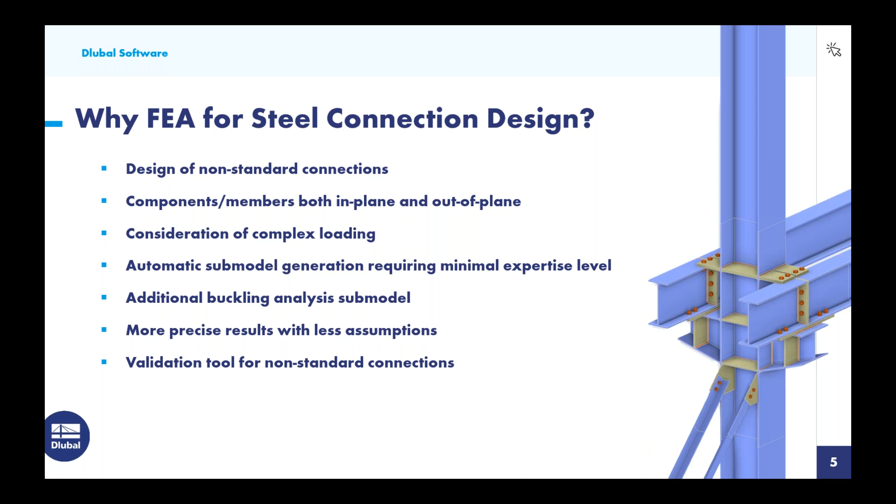So now moving on to the RFEM steel connection design concept, again a little unique in comparison to a lot of the other programs out there. We will probably generate the entire steel structure in RFEM. It's not required, but this is one approach that we could take.

With these one-dimensional members, such as beams, columns, and braces, these are actually going to be automatically converted into an FEA model, a submodel that we see on the right-hand side. You'll notice that those beams, columns, and braces now are two-dimensional surface elements that we can further mesh. Also, the bolt elements are going to be converted to 1D beam members as well, and we'll transfer the forces of these 1D bolt members back to the plate elements, the 2D surface elements, with what we call spoke members.

So we'll be able to view that within the submodel in our example today. Welds are also converted to 2D elements for a stress design, as well as one-dimensional rigid links to transfer those forces again back to the plate elements.

Now, we typically would model our steel structure with a linear elastic material. The program will automatically convert this linear elastic material to a nonlinear plastic material, so we'll be able to account for the yield strength of these steel materials themselves. We also will have some geometric nonlinearities that are automatically created.

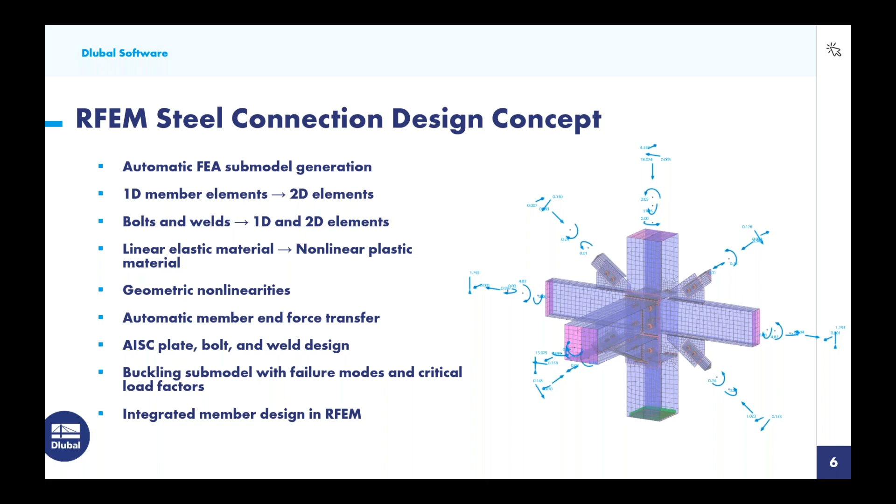And finally, the integrated member design within RFEM. Of course, we can get the connection design, but also the ability to design the members themselves, and not just steel, but any material that we offer. So you could combine this connection design with concrete, aluminum, cold form steel, even topics like fabric tensile structures. We could do the steel connection design within that same file.

Okay, so we will begin then in RFEM here with our initial example. When we create a new model, we will give it a model name. The type of model here is going to be in a 3D environment, so although we just have a simplified 2D frame here, we still are accounting for all forces in and out of plane.

Under the second tab, for those of you who are not familiar with our program, RFEM is the base program. This is where we can fully model, load a structure, and get the full static analysis. But if we want to do a more advanced analysis like dynamics, or we want to do design according to the various standards, this is where we would need to activate these optional add-ons, which you would purchase specific for your project design.

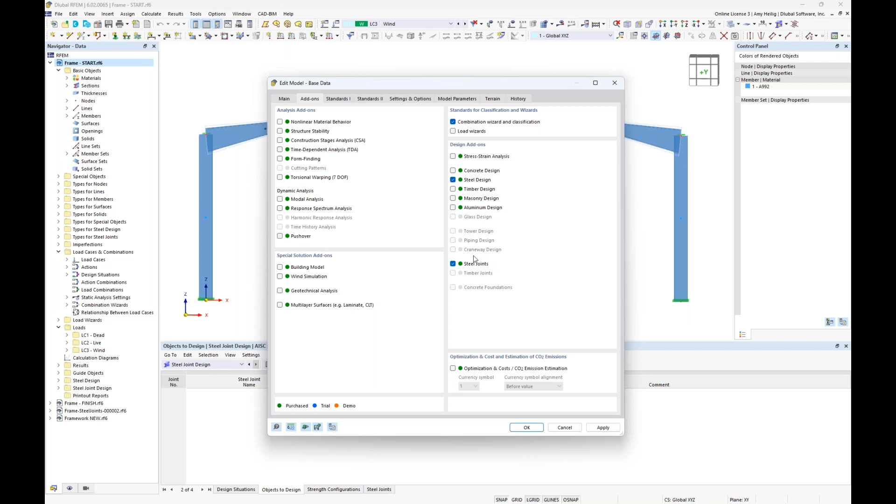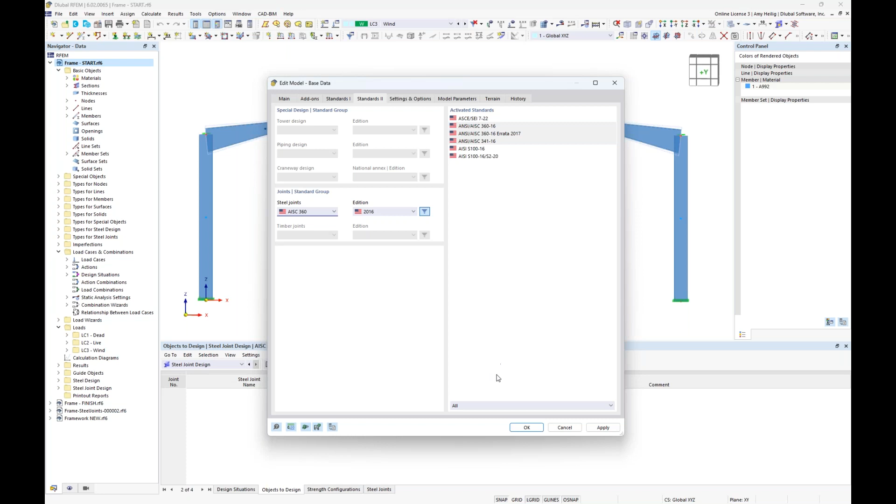Now for today, we'll be activating the steel design, which carries out the steel member design according to the AISC, and of course the steel joints for our connection design. Under the third tab, we will generate the load combinations automatically according to ASCE 7—we have added the 2022 standard, so that's available here. The steel member design will be carried out according to AISC 360 2016. And under our fourth tab, Standards 2, the steel connection design will also be carried out according to AISC 360.

So once all of this information is input into our base data, as you can see here, for the sake of time I've already modeled this simple 2D frame. Let's just quickly go over some of the information already shown. If we turn this into wireframe view, these members, as I mentioned, are just standard one-dimensional elements. This is pretty usual for any FEA program—when we model columns, beams, or braces, they're represented by this single line only. But if we turn this into rendered view, we get a better understanding of what this line represents.

Now, we also have here the materials assigned to these members, and currently these are all A992 linear elastic materials. We also have our cross sections.

You can see here the columns are assigned as W14 by 48, and for my beam members, these are W12 by 35s. But I also have applied a small taper at the beam member end.

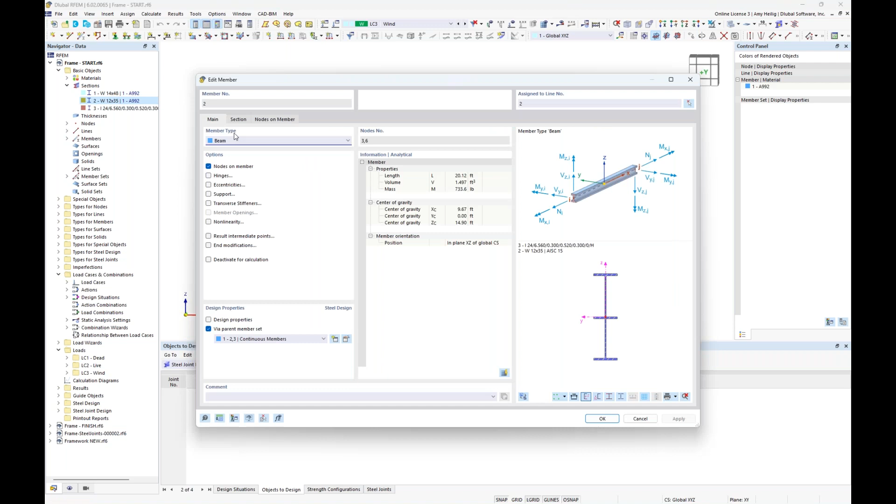If we double click on this member to go into the beam dialog box, under the second tab here, section, we have the ability to set a taper at the member start or the member end and other multiple options. I'm currently applying this taper at the first 25% of the member length.

We can also align the taper to the top of the member, for example, and this picture will update accordingly. So as mentioned, the beams are primarily W12 by 35, but where this taper occurs at the member start, I took that W12 by 35 and created it as a user-defined section to simply increase the depth, so now we'll linearly transition in the first 25% of this beam member back to the W12 by 35.

So that's a little bit about what's going on with our members. Turning this back into wireframe view to quickly explain our support conditions, we have a fully fixed support down here at the bottom, which was applied by utilizing the assign nodal support up here in my toolbar.

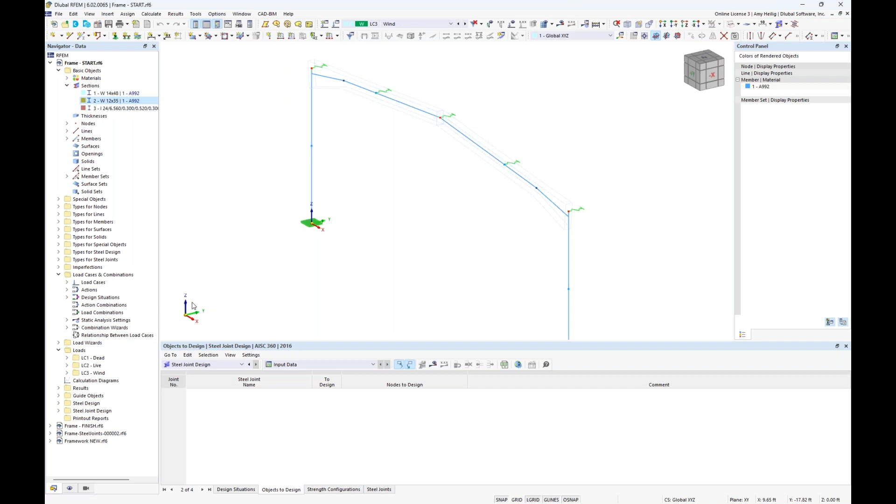Also, because we are working in a 3D environment, I went ahead and put some additional spring supports up here only in the lateral global Y direction, to account for maybe additional members framing in to give that lateral stability at the top of our frame.

And finally, we want to cover the loading. We have 3 simple load cases for today, and we can see these within our drop-down box up here at the top. If I turn on my loads, my dead load is 0.5 kips per foot, applied as a member load.

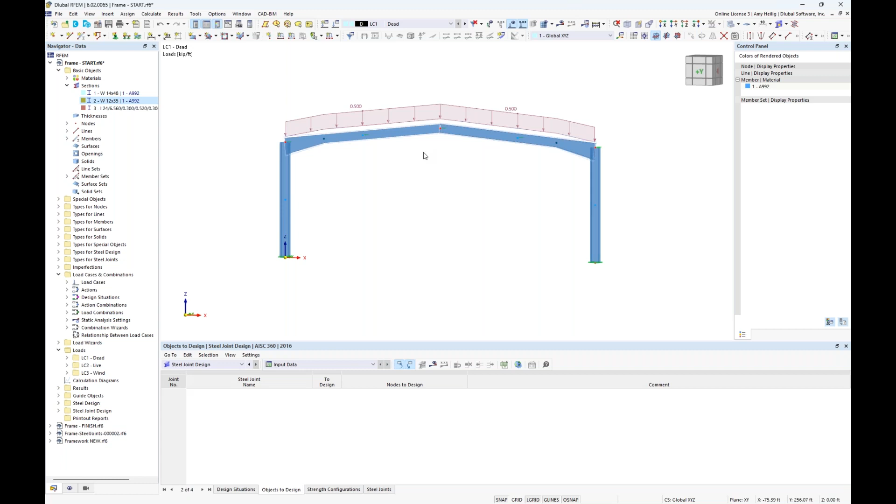When we look at our live load, same concept here, just with a reduced magnitude of 0.3 kips per foot. And then a very simple lateral load here for our wind load case with 0.3 kips per foot at the front side and 0.15 kips per foot at the rear side.

Going into our load cases and combinations dialog box, we will once again see here under our load cases our 3 simple load cases for today: dead, live, and wind. Category was set accordingly to the ASCE 7.

The program is automatically going to generate 2 design situations for us. We have our LRFD design situation and our ASD design situation. This is really nothing more than grouping together all of our factored load combinations according to ASCE 7 for this first design situation, and we can click on this little info button here to see the code references to those load combinations directly.

Notice that these are used within these optional add-ons that we turned on, so steel design and our steel joint or connection design. I will be utilizing these design situations. I'm carrying out my design according to LRFD for today.

Now we also have this second design situation, which is simply grouping together our unfactored load combinations. I'm going to use this for my serviceability checks for my steel member design, but we really don't need it for our connection design because serviceability is not something we're going to check.

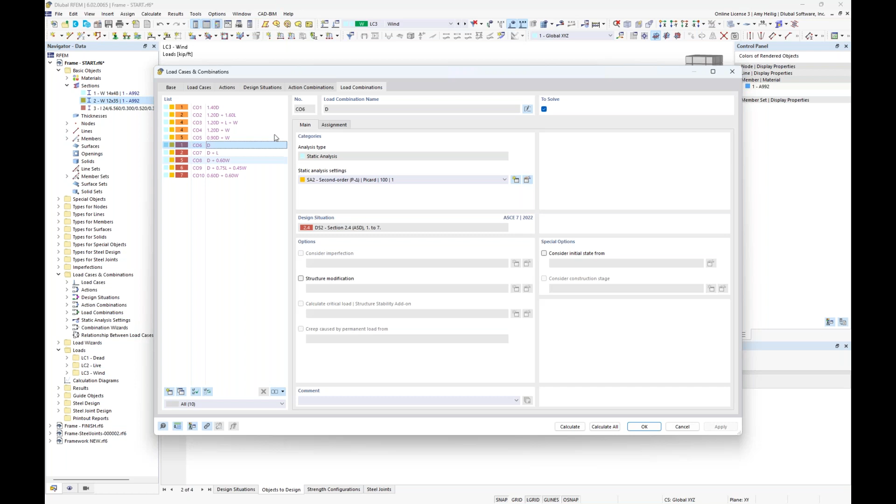Finally, under the load combinations, you can see the individual load combinations listed out based on the load cases I have defined. All of my factored load combinations are shown here in orange, which belong to that first design situation, and then we have our unfactored load combinations shown in red that belong to the second design situation. So just keep these design situations in mind, we'll come back to them a little bit later on.

Now that we have fully reviewed this model, let us begin by defining our first connection. Because I have activated the steel joints add-on under my base data, we now have a folder option over here on the left called types for steel joints. Currently this is empty, but I can right click to create a new steel joint.

Initially, I want to select the node that I would like to apply my first connection. So we can graphically select node number 6, or I could directly input the number here into this dialog box. Both of my members were automatically brought in.

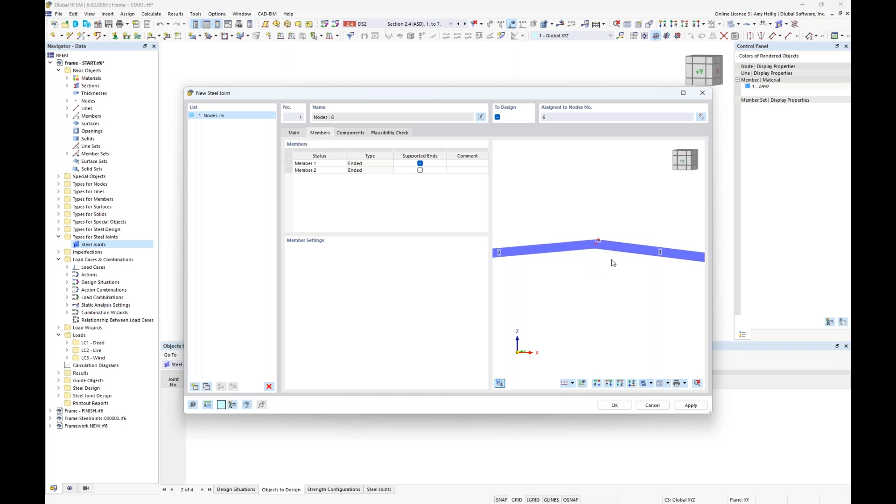Looking at this second tab, remember that we are going to extract out this submodel for our connection design and run it completely separate from our steel frame in Rfem. Because of this, we need to fully support one of these members in that submodel, so we'll utilize the support for the beam over on the left.

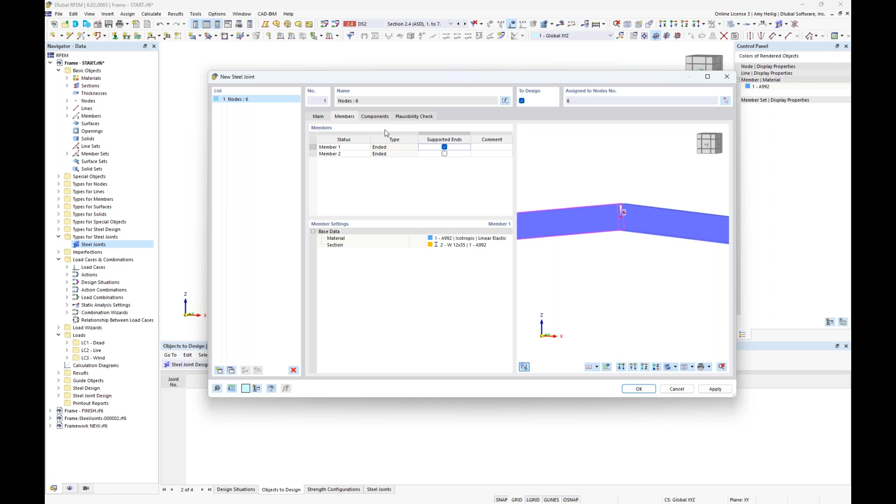Now the type is set to ended. This only means that if all of these members simply end at this connection, the type would be set to ended. In another scenario where we have a continuous column passing up through here, modeled as two separate members back in Rfem, we'd have an additional type option available in a dropdown called continuous. Under the Components tab, this is where we begin to build up our connection components.

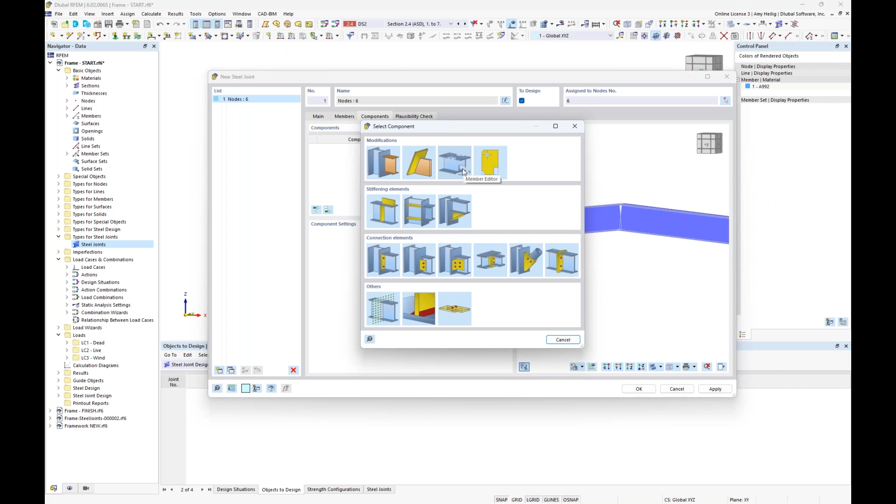We could individually do this with our connection database, our component database. We see each component we can individually input, such as end plates, fin plates, cleats, or plate-to-plate connections for beam splices. We also have stiffeners and haunches, and some additional modifications that relate to the geometry, so we can make member cuts, or add in openings or notches into our beam elements.

Rather than inputting these individual components, we could take advantage of our library options. Within these joint template library options, we have 4 general categories: rigid connections, pin connections, truss connections, and brace connections. Beginning with the rigid connections, we have additional subcategories such as beam to column, and within these subcategories we have additional template options.

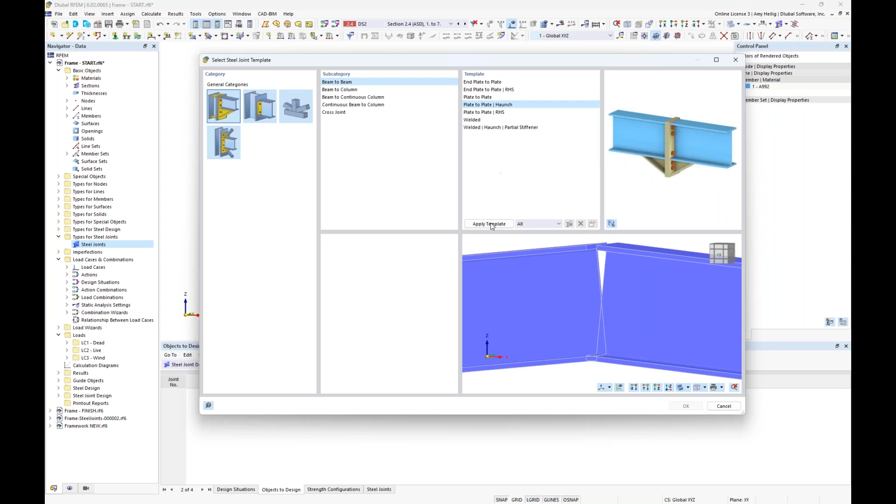Looking at beam to beam, we have an end plate to plate, and an end plate to plate with a rectangular hollow section. For today, we're going to utilize this option: plate to plate with a haunch. When I click apply template, it's automatically going to apply these components from this library to my specific members within my Rfem model. I can click OK, and now we see these individual components listed out and applied again to the members within the Rfem model background.

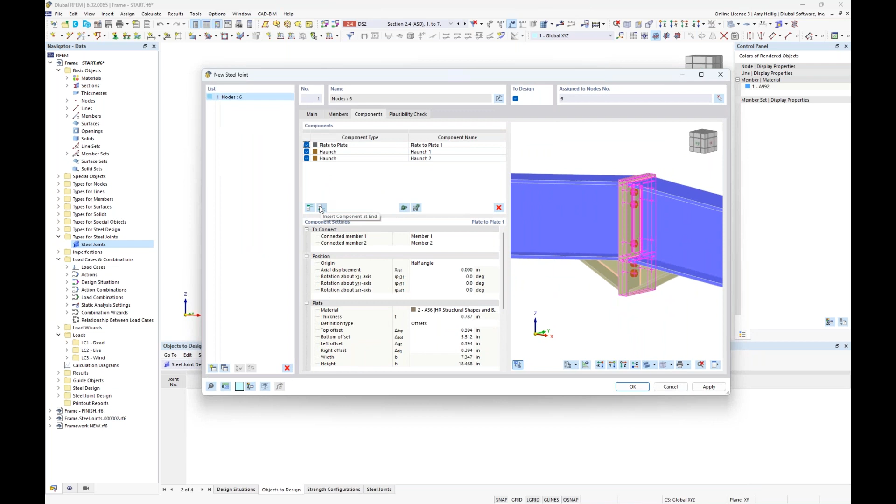We could certainly add on with the individual components and just use the library as a starting point. We'll need to make some modifications to our geometry, but once you have your connection set and use it quite often, it's recommended to save this under your own user-defined template. Within this button, you could give the connection a name, set the filter categories and subcategories, and that connection will always be available for any future Rfem model. That could be helpful if you don't want to redefine the geometry changes or components every time.

Starting off with the first component, you can see it is plate to plate, connecting both members 1 and 2. We can make modifications to the position, but we'll leave all of this as default. Now we need to define the material of these plates. I already have A36 defined within my Rfem model, but if you did not, you could access our material dialog box with these 3 buttons here.

Within the material dialog box, we can activate the material library. Over on the left, utilizing our filters to steel, to the AISC 360, we could choose whichever relevant steel material we'd like for this particular component. Utilizing the A36 that's already been defined, I will modify the thickness of my plate, changing each plate to 0.5 inches thick for a total thickness of 1 inch.

Now we need to define the plate offset. The offset just means what is the distance from the top of the plate to the top of the flange, and the bottom of the flange to the bottom of the plate, as well as left and right. Starting with the top offset, I'm going to modify this to a negative 0.375 value, dropping this plate down below the top flanges on my beam in the event that we have some type of sheathing material that we don't want interfering with these plates.

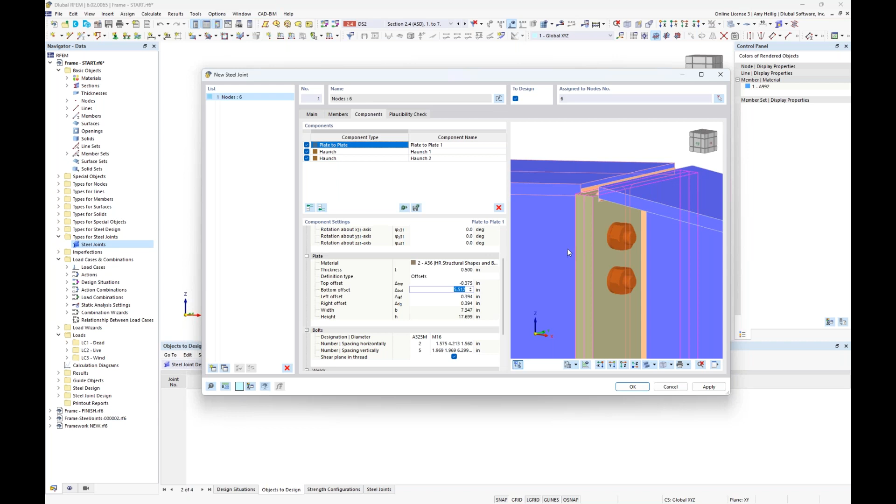Now, as far as my bottom offset, we'll go ahead and modify this to around 5 inches. And then we have the offset on the left and right, which I will set at 0.5 inches for the left, and I just hit enter on my keyboard.

And 0.5 inches on the right. Now, the dimensions of the plate will automatically update here.

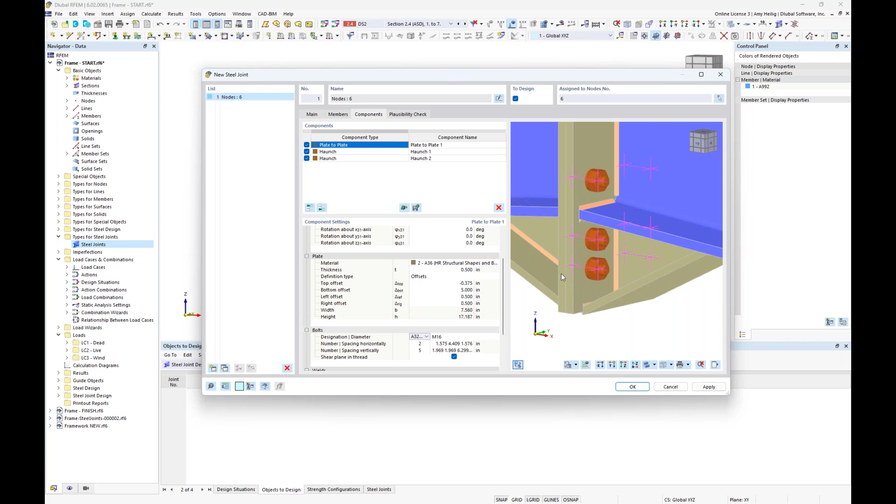Next up is our bolts. So we have here the designation of the bolts within our dropdown. We will select A325, and in the dropdown box next to this, we can then select the diameter. So we'll choose 3/4 inch diameter for our bolt layout today.

Then we have the number of bolts in the horizontal direction as well as the spacing. So currently we have 2 bolts in the horizontal direction, one on the left and one on the right. So we'll go ahead and stick with a total number of 2 bolts.

The input here in our second column is simply the horizontal spacing. So the first spacing that we want to input here is the distance from the edge of the plate to the center of the first bolt. So I can input 1.75 inches.

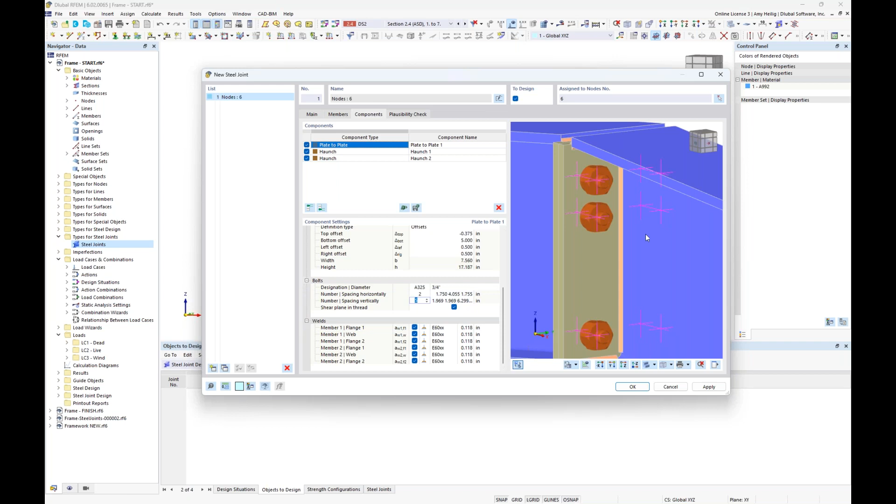I hit space on my keyboard. The next distance is from the bolt here to the bolt on the other side, and that's going to be 4.055. Then if I just hit enter, the program is intelligent enough to set that additional dimension here from the center of the bolt to the edge of the plate.

Now, keep in mind that the program will attempt to center these horizontally, so you may not need to make any changes there, but if we want to adjust that spacing, this is how we would do so.

Now, as far as the bolts in the vertical direction, currently we have 5 bolts, but I'd like to reduce this to 3 bolts instead. And obviously, once we update this, we need to adjust our spacing.

So we have the vertical spacing. The first input option is going to be from the top of plate to the center of my first bolt, which will be 3.5 inches. I hit space on my keyboard.

The next spacing will be from this first bolt to the second bolt, which will be 5.5 inches. I hit space again, and we need to lastly define the spacing here between bolt number 2 and bolt number 3 as 5 inches. I hit enter on my keyboard. The program will populate the last spacing here from our bolt down to the bottom of the plate.

Now, is the thread located in the shear plane for our bolts? If so, we leave this option turned on. If not, we would go ahead and uncheck it.

And finally, we move on to the welds. So we can see here that these welds are labeled within this first column, but as I scroll through them here, they're also highlighted graphically.

And if I didn't want to apply any one of these welds, I could just simply uncheck it here, and that weld would be taken away from this particular connection.

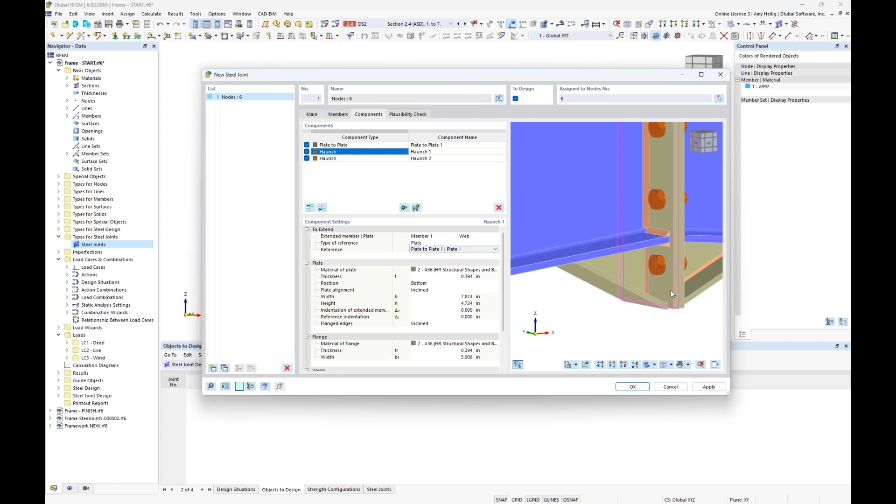And we want this haunch to be extended then to our plate shown here. The material is set to A36. We do want to modify here the thickness to maybe 0.5 inches.

We can also modify the width and the height. So I'll modify the width here to 12 inches, and we should see that graphically display here. The height is going to be 5 inches. And you'll also see that the program automatically included a flange here as part of my haunch.

If I wanted to get rid of that flange, I could go ahead and use my drop-down box here to select the no option, and that flange should disappear.

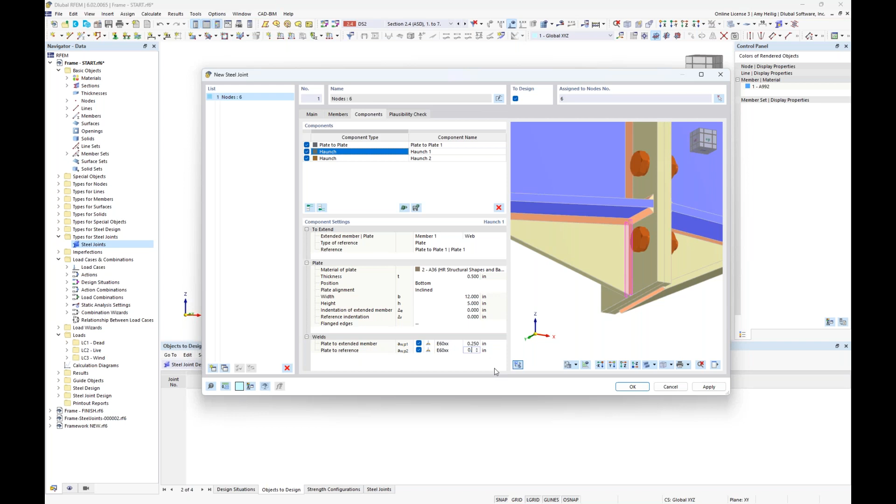Now, finally, we have our weld input for the haunch itself, and we have two welds, which we'll go ahead and leave as a default double fillet weld on either side. But our first weld is on the underside from the plate to the bottom flange, where we will modify the throat thickness to 0.25. And our second weld is going to be from the haunch to this end plate here, which again, we will modify that throat thickness to 0.25 as well.

So looking at our haunch on the left-hand side, again, we're complete with this second component. We move over here on the right-hand side, and we want to make those exact same changes that we just did to the left-hand side.

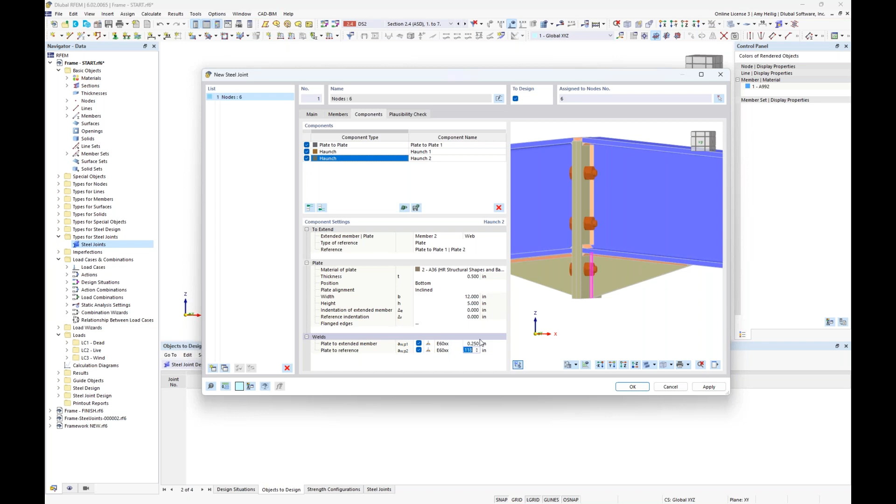So we'll modify here the thickness to 0.5 inches. We want to modify the width to 12 and the height to 5 inches. And then we will also want to select no flange here in our dropdown. And finally, we will modify the throat thickness to 0.25 for both of those input options.

So realistically, this connection is now complete. And again, if you utilize this connection quite often, save it to your user-defined library so you can pull it open with these modifications already set.

The final thing to do with any connection is to check out this fourth tab, the plausibility check. So we see here, it's a green checkbox with no errors found. If we had any issues, such as maybe bolts overlapping welds or plate elements, or maybe we have a weld extending beyond a plate, these would all be flagged here so that we could take care of those errors before we move forward with the calculation.

So now that this connection is complete, we can click OK here. And what we should see is that graphically, we're going to represent this connection here within the main RFEM model.

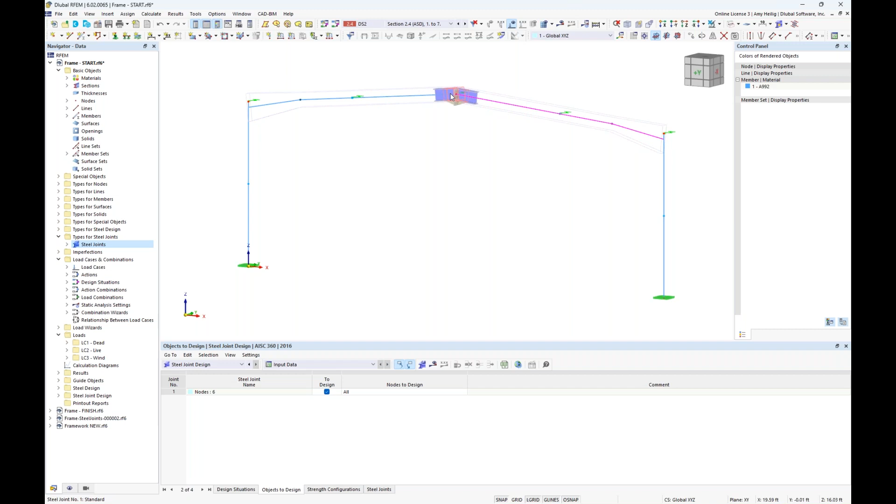Now, to explain a little bit further about what's going on, you'll notice that when I turn this to wireframe view, we still have those one-dimensional members. And notice that these members are still framing from node to node. We're not going to cut off this one-dimensional member where this connection starts.

Really, this is just a graphical display of that model that will be acted out and completely calculated separately from this RFEM model. But it is nice just to view in a little bit more detail exactly what's going on.

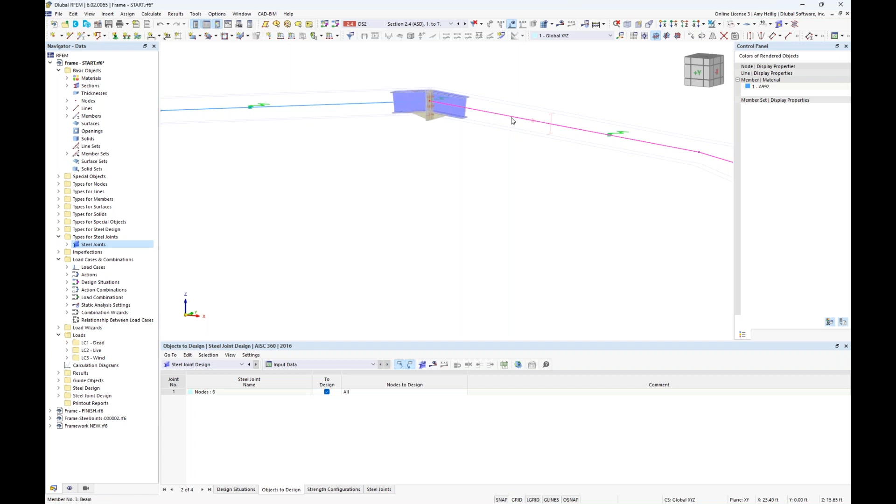Also keep in mind too, a common question is that the member end forces for this beam will actually be taken at this node. They are not taken at this distance away where the connection will begin.

Going back then into the rendered view, we can see this connection here with all of the available components, the geometry changes that we just input.

Now, with the display of our connection, we also have an additional option up here in our toolbar where we can completely hide that joint model with this dropdown if we're not interested in seeing it. We also have this simplified joint model, which is just represented by some box type symbols here. And finally, we have the detailed joint model, which is currently default and turned on.

So now that we have defined this first connection, we would like to move on to our second connection, which is going to be the tapered beam to the column.

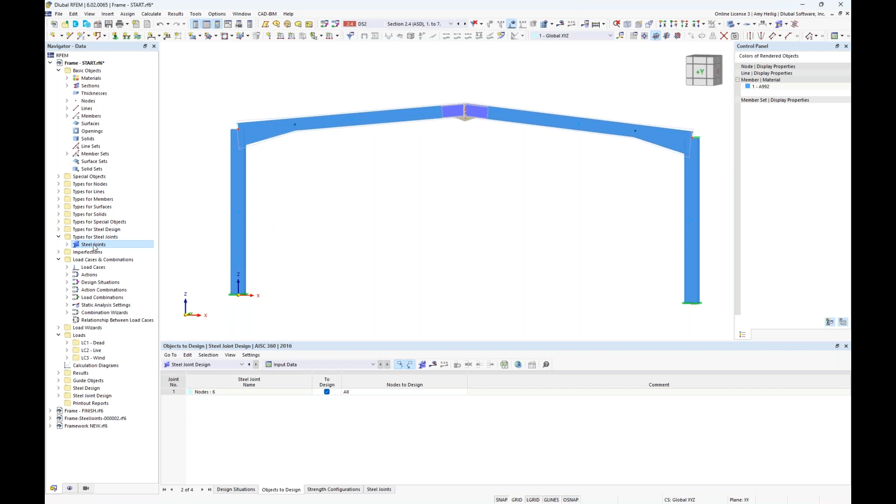So we can yet again right click over here in the types for steel joints to create a new steel joint definition. And we want to graphically select here node number 3. I click OK. The two members are automatically imported in here, and under the second tab, if you remember, because we're creating that FEA submodel, at least one of these members needs to be fully supported.

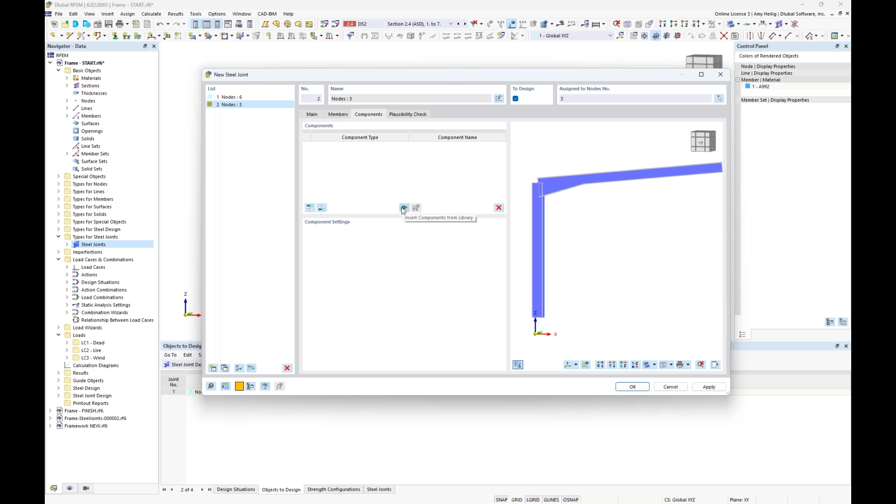So we'll go ahead and leave the column as fully supported. Under the components, we will take advantage of our library option here.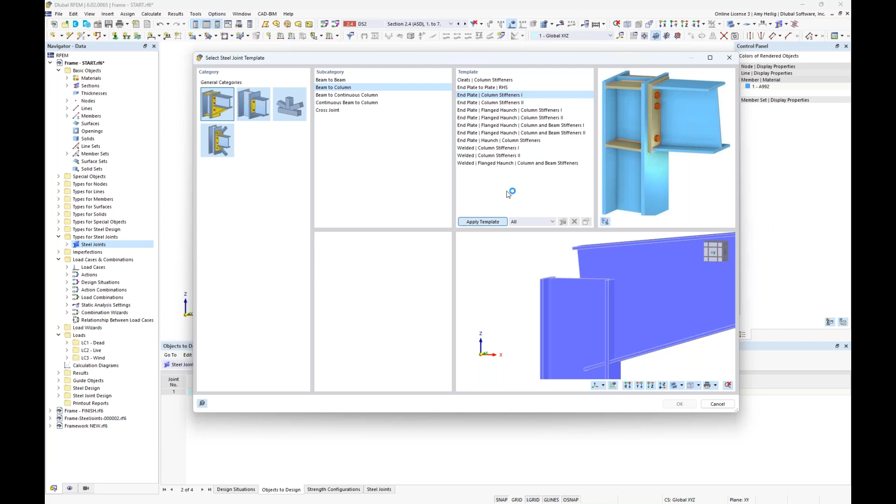And this time under our rigid connection, we want to modify this to a beam to a column. Within the additional template options, there are many different options, including cleats, maybe an end plate. For today, we want to utilize the column with stiffeners. I'm going to hit apply, and we should see these individual components applied directly to my model.

I think we could all look at this connection and agree that this certainly does not look correct. This is really just an issue of the program not knowing which member is the beam versus which is the column, controlled with our options on the left. In our dropdown for the column, we change this to member number 1, and for our beam element, we specify member number 2. Now this connection should look quite a bit better.

So we click OK. Just like with our previous joint, we will now see all of those components individually listed out here. Let's begin with the end plate. You can see here that we are taking member number 2, which is that tapered member, and connecting it to the reference member number 1.

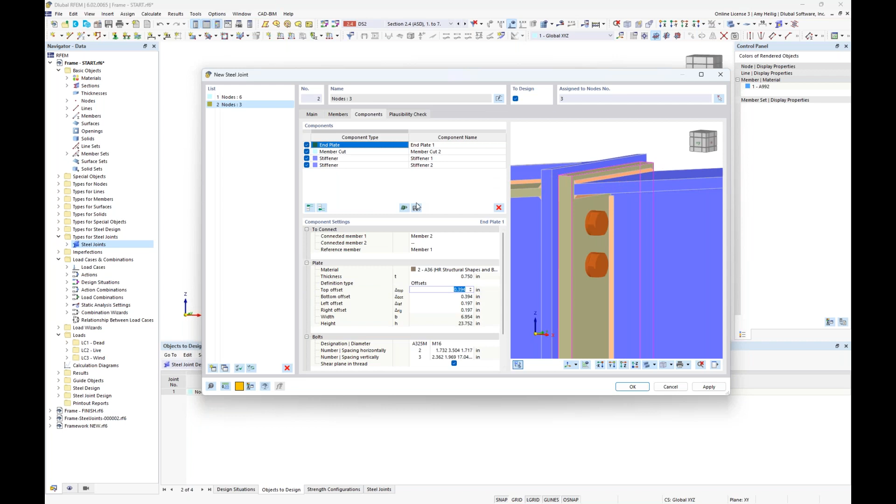Steel A36 will be utilized for the material. If we want to modify the thickness, we can input this as 0.75. Very similar to our last plate element, we want to define the offsets. Looking at our top offset, remember the top of the flange to the top of the plate, we'll modify this to 0.5 inches.

When we look at the offset at the bottom, we will modify this to 1 inch. Then we have an offset on the left and right hand side of those flanges, and we'll set this as 0.25 on the left and 0.25 inches on the right.

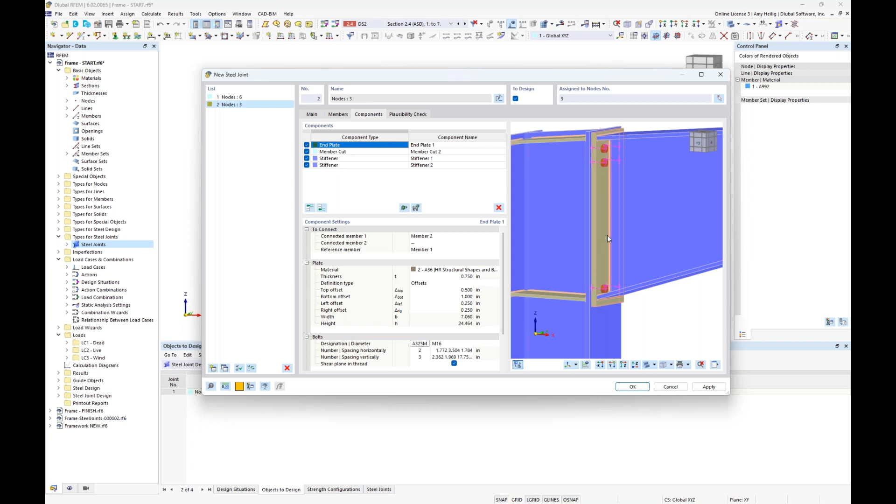Now looking at our bolts, clearly we need to make some modifications here. So we will be selecting A325 from our dropdown. The diameter of the bolt is going to be 7/8 inches. We are going to leave this as 2 bolts on either side, 1 bolt on the left, 1 bolt on the right. The program again has centered these, so I'll leave these as default options.

As far as the vertical bolts, currently we have 3 shown, but I want to increase this to 4. Once I input the 4 bolts, we'll make some modifications to our vertical spacing as well. The first input option is from the top of the plate to the center of the first bolt in the vertical direction, which will be 3.5 inches.

I hit space on my keyboard. We now need to define the spacing from bolt number 1 to bolt number 2, which will be 5.5. I'm actually going to apply 5.5 inches to the additional spacing 3 times between all of these bolts. I then hit enter on my keyboard, and we see all of those update graphically here. We'll leave the shear plane and thread turned on.

Finally, we have our welds. So we have the weld at the top flange, again leaving the fillet weld on either side as default with E60 strength. We'll modify the throat thickness to 0.25 once again. We take a look at our weld at the web here, and modify this throat thickness at 0.25, and do the same for our weld down at the bottom, modifying this thickness to 0.25. So now our end plate is complete.

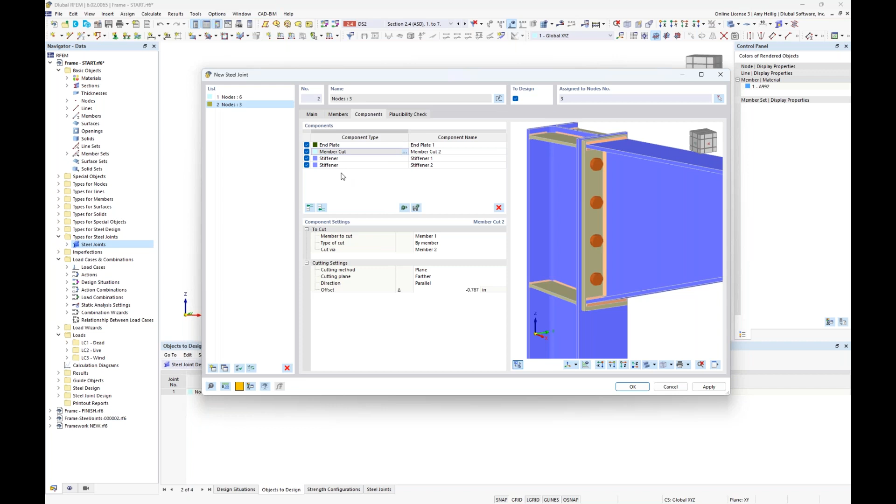So we'd like to move on to our second component. Remember that not all components necessarily insert a physical object into this connection, but there are components that have to deal with modifying the geometry. One of them is called a member cut. Keep in mind that for any one of these components, we can always not consider them by unchecking them here.

Without that member cut, you can see here that the column just stops essentially at the middle of that tapered beam. So this member cut will actually extend this column up to the top flange of the beam. We're taking member number 1 here, and we're going to make that cut by referencing member number 2. Now the cutting method is set to a plane, and the cutting plane has 2 options, either closer or farther.

When I set this to closer, notice that the column is automatically going to be cut off here at the bottom flange. But when I use the option farther, we'll extend that column to the top flange instead. Additionally, the cut of this column is matching the incline or pitch of my tapered member shown here in this 2-dimensional frame.

If we want this column to be completely straight across, we can use our drop-down options to choose perpendicular instead. Now notice that column is cut straight across, not considering that incline. We'll go ahead and match that pitch by changing this back to parallel, and now that will match the top flange of my tapered beam.

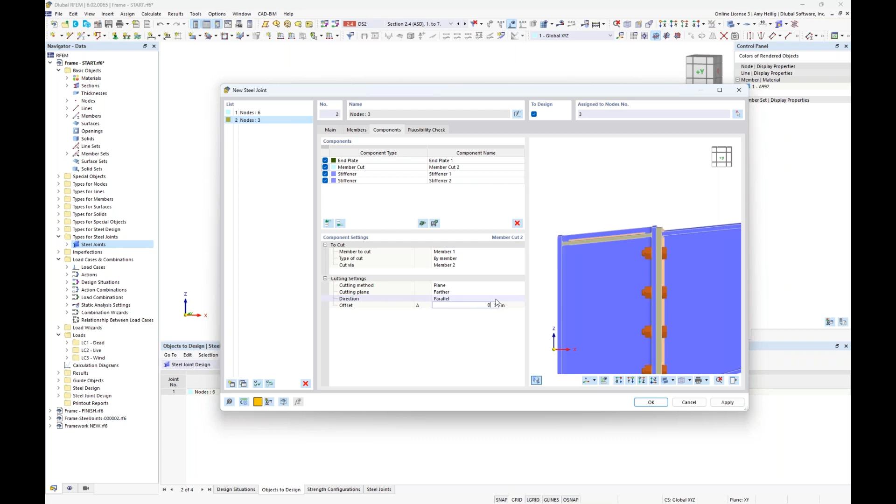We also have the ability to set an offset. If I have this offset set at 0, it simply makes that member cut to match the top flange, or I can set this offset to negative 0.75 inches, which will extend it slightly above the top of this beam. That's all that is needed for our second component.

We now want to move on to the stiffener. We see here this stiffener applied, and the stiffened member is referencing member number 1, but we want to apply these stiffeners based on referencing member number 2, the beam. The material is A36 once again.

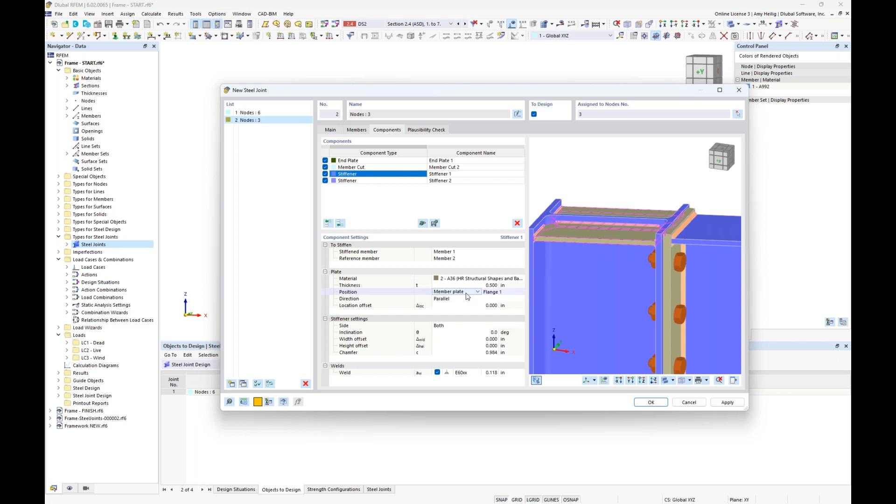Perhaps we want to modify the thickness to 0.5 inches. And we are applying these stiffeners based off the member plate flange number 1 here of our beam, so everything is parallel to that top flange.

Alternatively, if I didn't want it to be parallel, I can make it perpendicular so that we have the stiffener going straight across. Of course, this doesn't make sense here because our column isn't extended up high enough, so we'll go ahead and change this back to parallel.

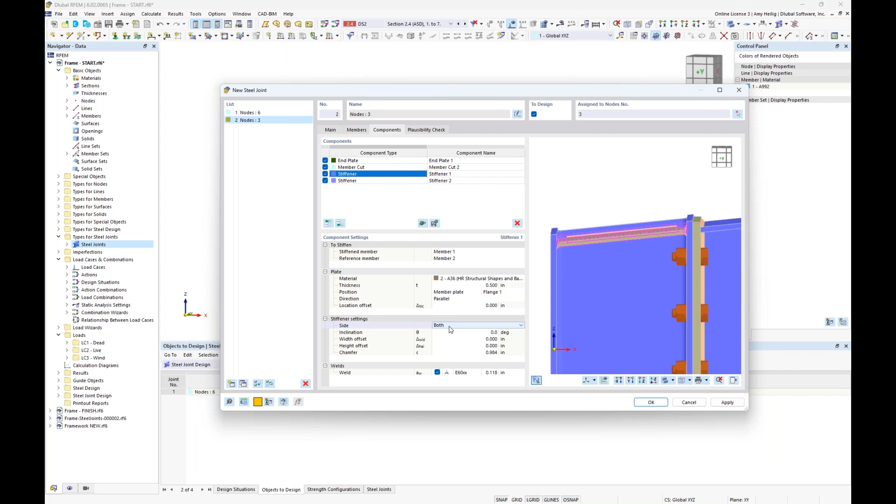We could also add in an offset to move the stiffener up or down. And we also have the ability here to set the stiffener on both sides, or within this drop-down option, we could choose just the left or just the right.

And finally, as far as geometry, we have a small chamfer here, so we want to set this dimension to 1 inch exactly.

Finally, we have the weld. Just like what we saw with our other weld input for our additional components, we're going to leave this as a double fillet weld, E60, with a throat thickness of 0.25. So this is just connecting that stiffener back to the column.

Now we also have our last component here for our stiffener shown here at the bottom flange. Again, if I didn't want to account for it, I could just completely turn it off, or if I wanted to delete it altogether, I can use this red X.

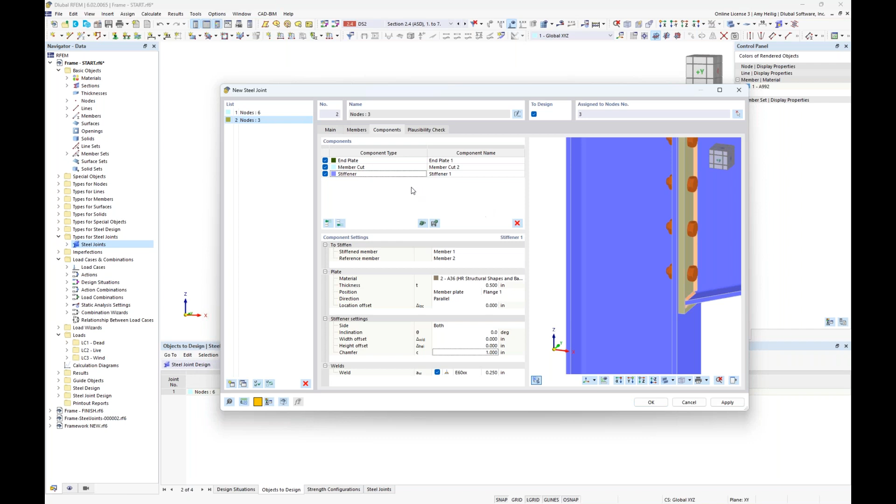So I just make sure that I'm selected here under that particular component. I delete it altogether. The reason why I wanted to show you is that we have a nice feature here for existing components: if we right click, we can copy the component to the end of this list. This is a huge advantage if we've made a lot of modifications to our component and we don't want to input all that information again, we just simply make a copy.

Now currently, the second stiffener is sitting right on top of the first stiffener, so that's not ideal. But what we can do here is simply move it by referencing, instead of flange number 1, we'll select flange number 2, which is highlighted here as I select it within my dropdown. Now currently it's set to parallel, so it matches the angle here of that taper.

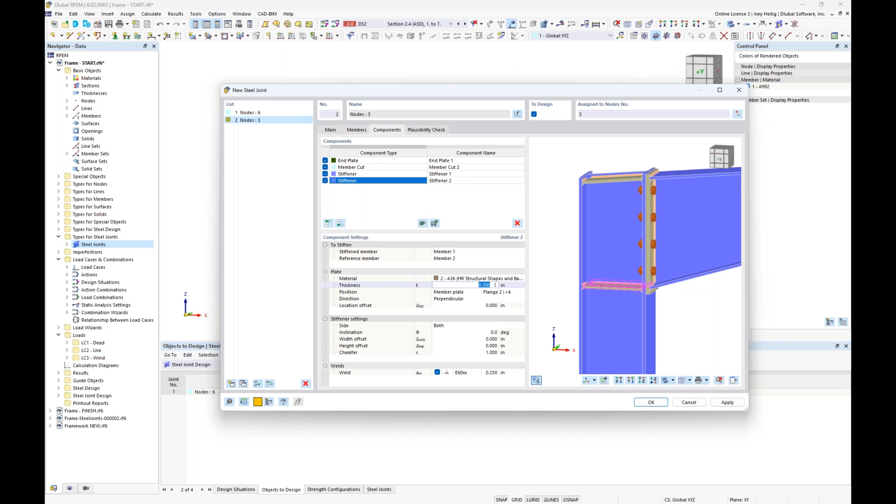But if we wanted to modify this to perpendicular, we can do so. Now we see that stiffener shown here at the bottom in the perpendicular position. And if we wanted to modify the thickness to something smaller, we could do so here at 0.375. So now this fourth component is now complete.

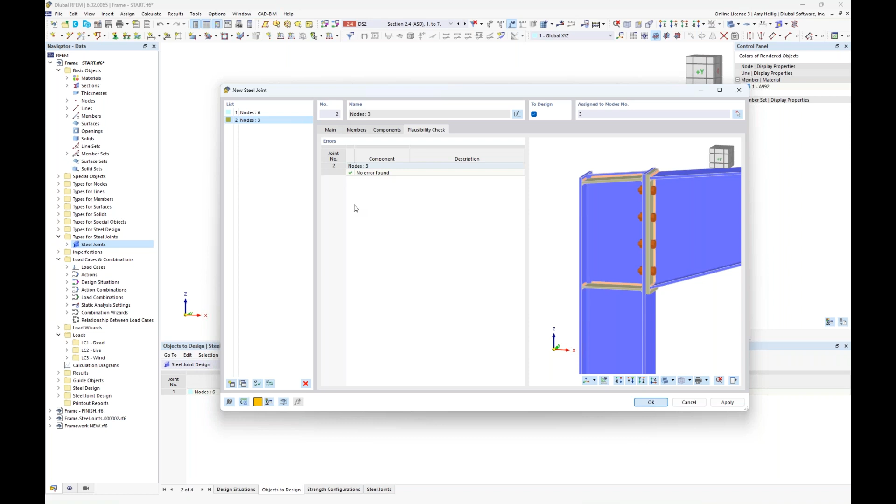Again, checking the plausibility, no errors found. That's great. If we had any issues with geometry or anything else, the program would notify us here. So when I click OK, we should now see this connection applied over here to the left-hand side.

And what you will notice is that we actually want to apply this exact same connection here on the left-hand side to the right-hand side. Rather than redefining all of those additional components and a new steel joint, the program's intelligent enough that I can go back to node number 3 here, my connection that I just defined, and in addition, select node number 11.

And I click OK. So we have an identical layout for our joint template here. It's just simply the mirror image of the other side. So if you have the exact same connection details, but it's just slightly oriented differently within the model, you could certainly apply multiple nodes to the same joint definition.

All right, so we are almost ready to move forward with our analysis and design. But one thing I wanted to cover before we do: if we go back into the steel joints and edit the dialog box, this brings us back into the dialog box we've previously been in, but you'll notice there are design configurations, and one option here for strength configuration with a default setting already specified.

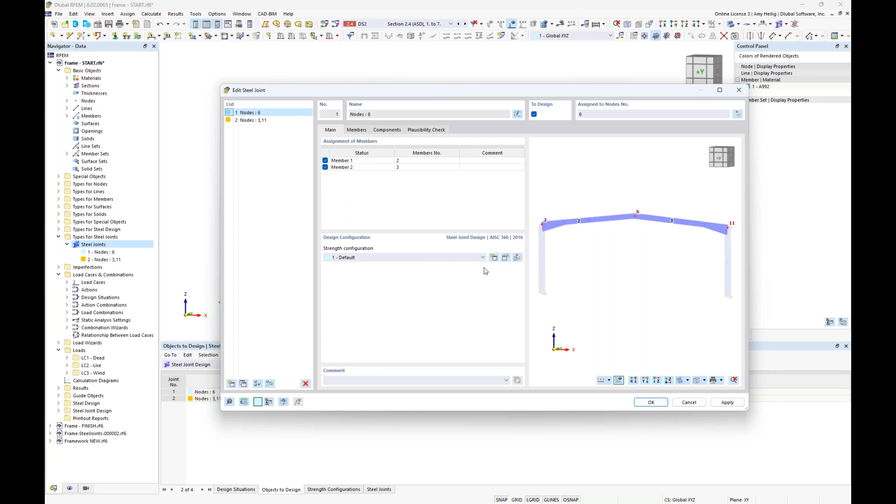The strength configuration, if we edit this, is specific to the AISC design of our connection, but also to that submodel that's going to be generated underneath the hood. We have to assign a configuration to each one of these joints, and you can also create different configuration settings for different joints.

Taking a look at the default option shown here, you'll notice the first option for my connection design is to also perform a buckling analysis. So we can go ahead and turn this on. Now, I do want to let you know that you have to own the stability analysis add-on in order to carry out the buckling analysis in addition to the actual AISC connection design. So if you want to take it that step further, you need to own the stability analysis add-on.

You don't need to go back to the base data and activate it. Everything is controlled here through this dialog box. We now get an additional tab here for buckling, so in addition to that FEA submodel, we'll carry out an additional submodel for the eigenvalue analysis.

You can see the analysis type is set to a linear analysis, but we also have nonlinear options here. Just keep in mind that calculation will take a little bit longer if you apply a nonlinear analysis. We will calculate by default 4 eigenvalues, but you can increase or decrease this depending on how many different failure mode shapes you're interested in.

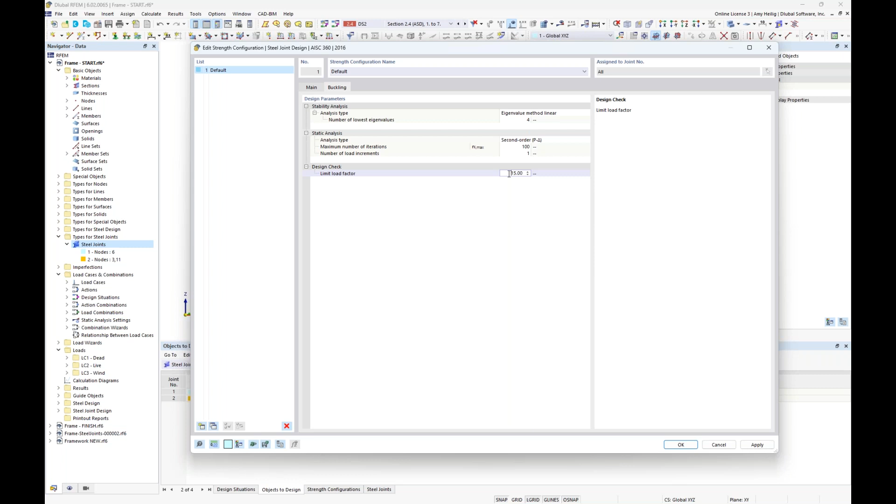Second order analysis is considered, and finally we have the limit load factor. This is a user defined input option, and it relates back to that critical load factor. So when the critical load factor falls below 15.0, the program will flag you that maybe buckling is a consideration you need to look at further for your connection. Again, you have the ability to increase or decrease this factor. It'll make a little more sense once we look at the buckling results.

Going back to the main tab here, we have our resistance factors for LRFD design, straight from the AISC standards, safety factors for ASD, and a lot of this information at the bottom is specific to the FEA submodel and mesh generation. The FEA mesh back in RFEM for our overall structure is most likely entirely too large to apply to this much smaller submodel, so we will go ahead and submesh that to something much smaller. We have some default options shown here, but you can always come in and modify the FE mesh settings for that submodel.

Now, one thing I do want to go into a little further detail is the limit plastic strain. You'll see this input is set by default at 5%. So let us go back to the PowerPoint to discuss this in a little more detail.

By inputting this plastic strain limit, this is going to be used for the strength limit state criteria for all surfaces. What I mean by surfaces: remember our one-dimensional members, our beams, our columns, these are all converted to 2D surfaces. So our flanges, our webs, our end plates, haunches, all of these are now 2D surfaces. We're probably utilizing a linear elastic material, but the program automatically converts this to a nonlinear plastic material. With this material model, we reference the von Mises yield criterion stress failure hypothesis.

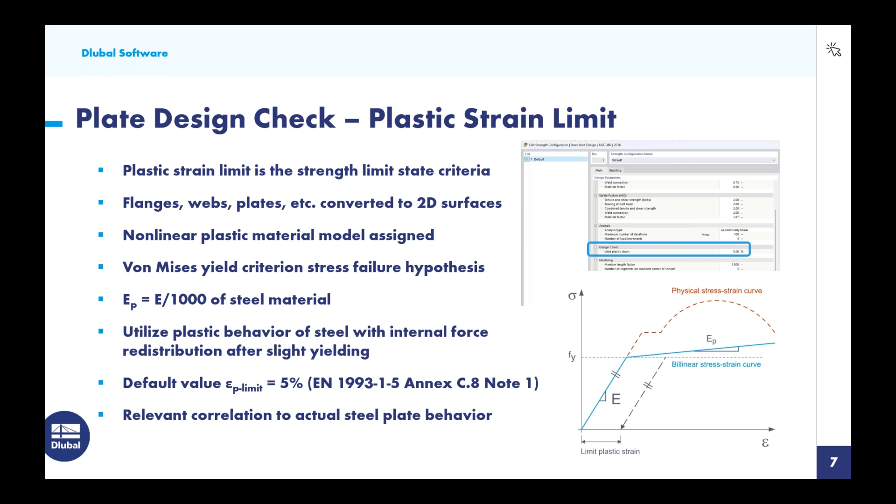Overall, there have been studies done showing good relevant correlation to actual steel plate behavior by limiting the plastic strain instead of the stress. So that's what's going on within our design configuration for all plate elements - this is the only check we carry out, by limiting that plastic strain.

Once this information is input into our configurations, the final thing to do is go back to our RFEM model and jump down to the steel joint design add-on. Within this add-on, in table format, we have our two design situations, as we covered earlier. We have our LRFD design situation where we set this to the strength limit state for LRFD design. Alternatively, if carrying out ASD design, I'd use the dropdown for my second design situation with unfactored load combinations according to the strength limit state for ASD design. But I'm carrying out LRFD design today, so we'll utilize that first design situation.

The objects to design - we will be designing all three connections here, and in a very similar workflow, also have the steel member design. I did an entire webinar devoted entirely to steel member design according to the AISC, which goes into much more detail than today. My point today is just the ability to design the members along with the connections.

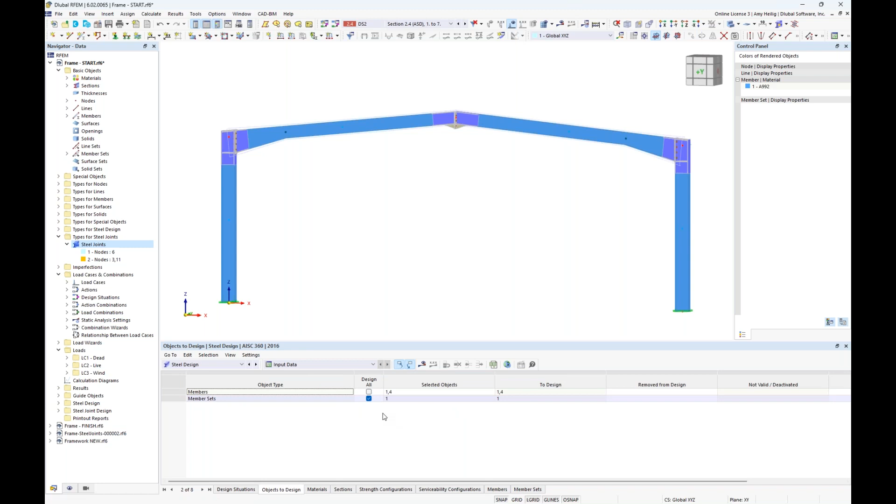Once we've input this information into the table, we are now ready to go to calculate all. But keep in mind, because we are now introducing these FEA submodels, it does take a few minutes to solve - longer than if we just had these steel 1D members alone. So for the sake of time, I'm going to open up an already saved model here that has carried out the calculation.

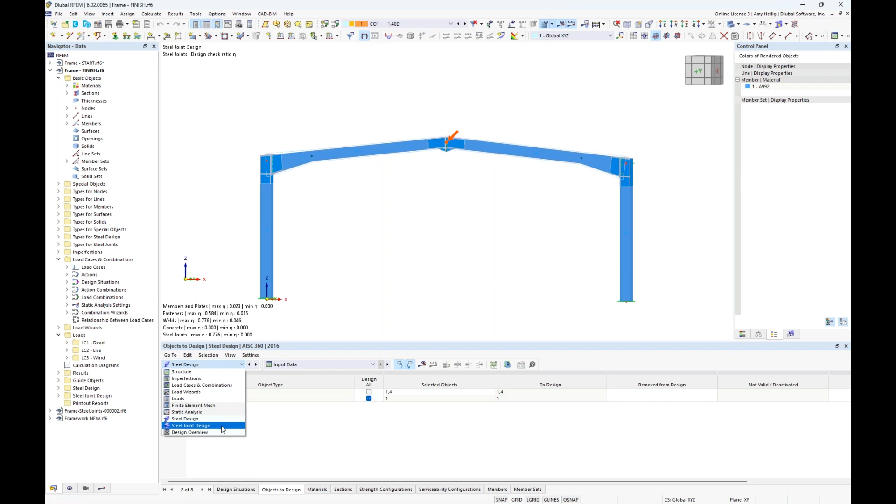Well, what we should see once we run our analysis and design under the steel joints table here is our results. And we can view the stress strain analysis design ratios by node. So now you'll notice here that I have 3 design checks for each connection: the plate check, the bolt check, and the weld check.

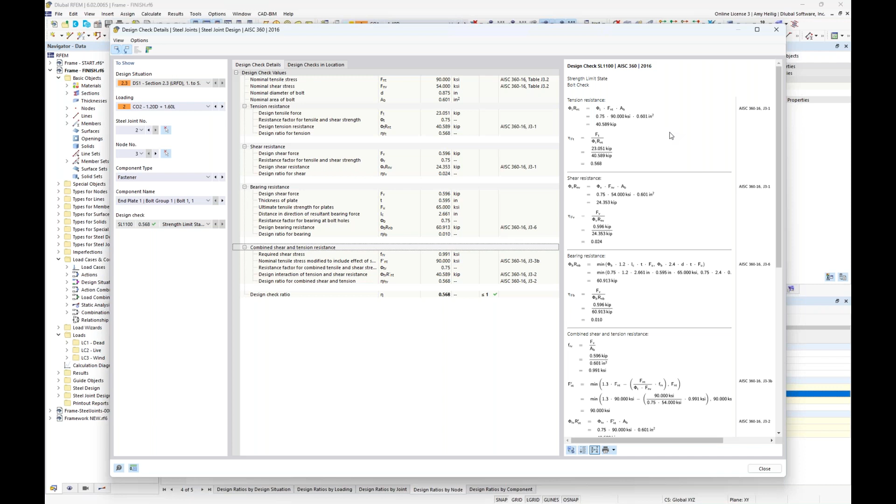Within any one of these specific design checks, such as the bolts here, I can go ahead and activate my design check details. This is true for both the bolts and the welds, but we'll take a look only at the bolt elements. I'll go ahead and expand out my options on the left-hand side, and I'll use my control key to zoom in here to these equations, so hopefully those are a little bit easier for you to see.

We are checking the bolts for all scenarios carried out by the AISC, including tension resistance, shear resistance, bearing, combined shear and tension, and so on. Then we take the max design ratio out of all of these, and we present it to you as that design ratio. All of the code references are given here, all of the formulas line by line, and the variables are listed out. You can add this information to your printout report, so we're trying to be as transparent as possible about where these specific checks come from.

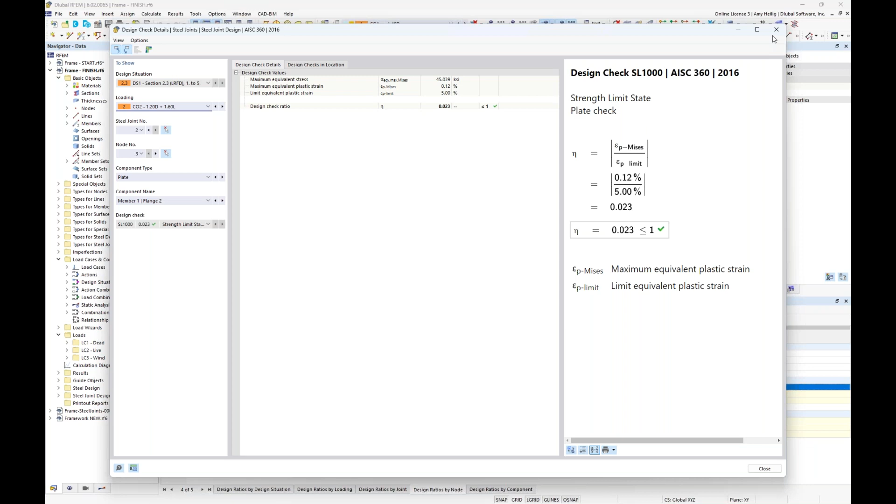Same concept for our welds. If we look at our plate check, currently for my connection shown here at the left and the right, which you can see are highlighted, I'll go ahead and open up my design check details, and you can see this looks quite a bit simpler. This goes back to the PowerPoint slide we just covered: for all of our plates, we're talking flanges, webs, end plates, haunches, we only check this limit plastic strain. So we have the limit plastic strain set at 5%, and then we have our plastic strain from the actual analysis, and we ultimately get a design ratio. That's going to be a little bit different here for our plate checks versus the bolts and the welds.

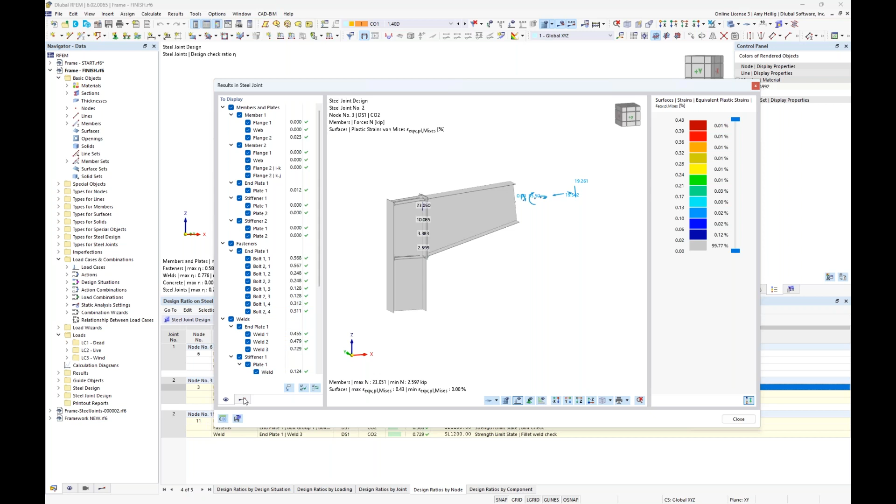In addition to the design check details, we also have the ability here called the results in steel joint. We can go ahead and activate this, and it will show us our submodel of this particular connection. We're currently looking at the tapered beam to the column connection. If I scroll to my second tab, we are viewing the plastic strains for this connection for load combination number 2. Zooming in, at first it doesn't seem like much is going on, and that's simply because we gray out the strains that are probably not of much interest. But we do see some higher strains here at the top of the connection.

Now, alternatively, we can toggle this to the stresses instead, and this might look a little bit more interesting, that we can actually view the stresses for all of our components here graphically. And of course, where we saw those higher strains, we're also going to see those higher stresses given.

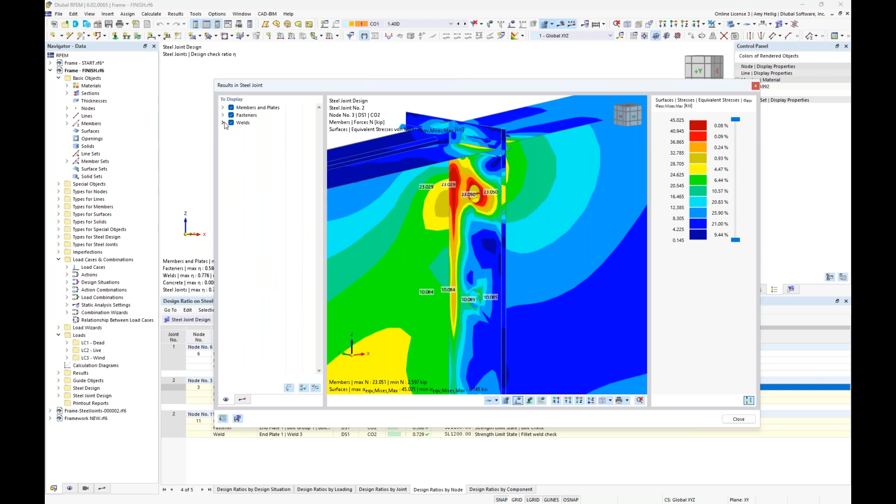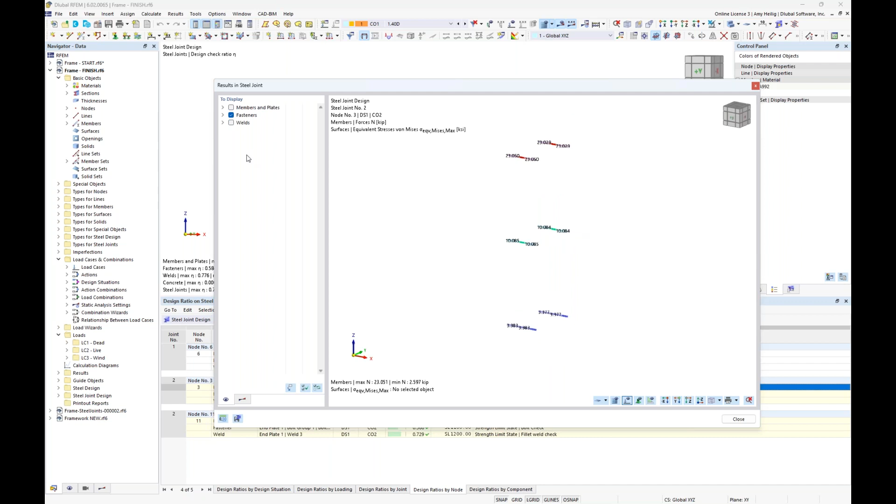Going back to this initial tab, if I collapse these different display options, I have the ability to turn off completely my members and plates and maybe my fasteners, and now I can view the stresses just on the weld elements themselves. Or if I'd like to turn on the bolts, I can activate the fasteners, and we see the tension forces in kips given to us graphically. Finally, going back to the display of all of these options, we go back to the stresses shown for all components.

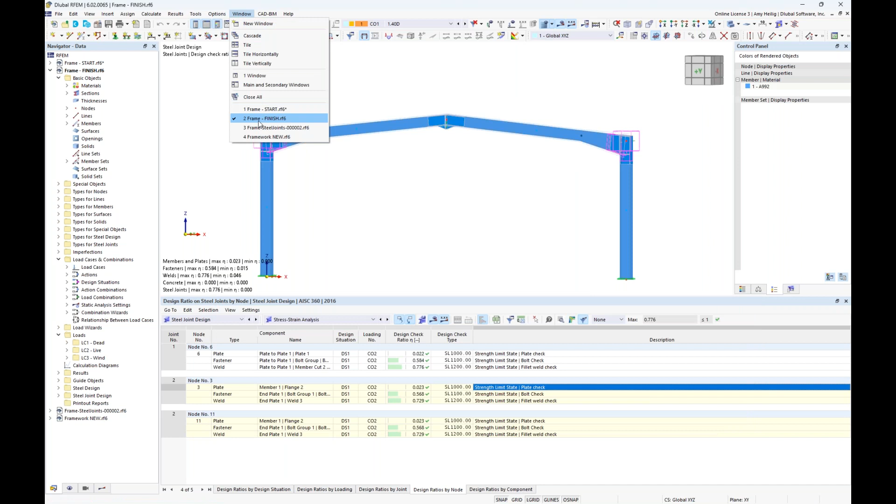In addition to viewing this information here, we have the ability to save this model to our computer, and when we save this model, we can open it up like any other RFEM model. I went ahead and took the liberty to save that particular connection to my desktop so that we can see what this model actually looks like, that's all being created under the hood automatically for us.

So here is our exact same connection with the FEA model shown to us here in detail. Notice that the web elements, the flanges, everything was converted to these 2D surfaces. And if we turn this into a wireframe view, you'll see here everything is meshed automatically for us.

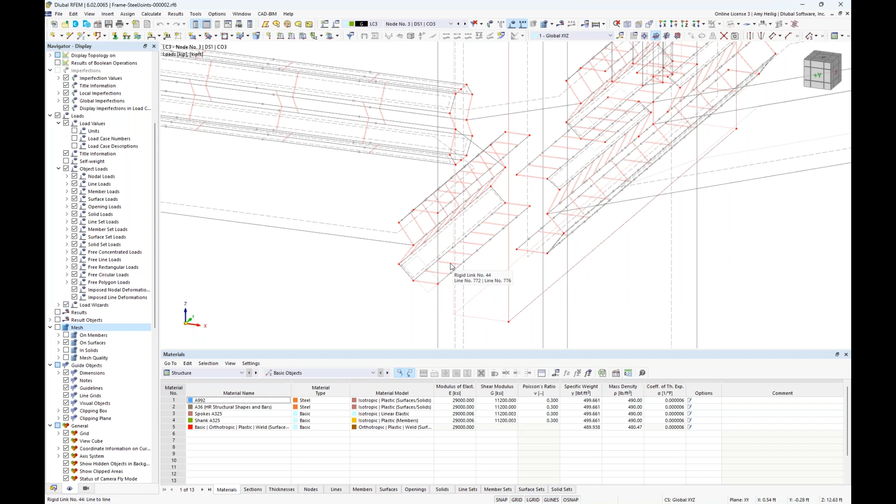And perhaps if I go back to my navigator here to turn off the mesh, we can look at our weld elements. These weld elements are a mix of 2D surfaces in order to get the stresses, but we are also transferring forces between the weld and the plate elements with these small rigid links. We also have our bolt elements.

So I had mentioned some of this in the PowerPoint, but if we double click here, we can actually see that these bolt elements are represented by a standard beam element. The cross section is also taken into consideration, the diameter here of our bolt element that we've set, as well as the material.

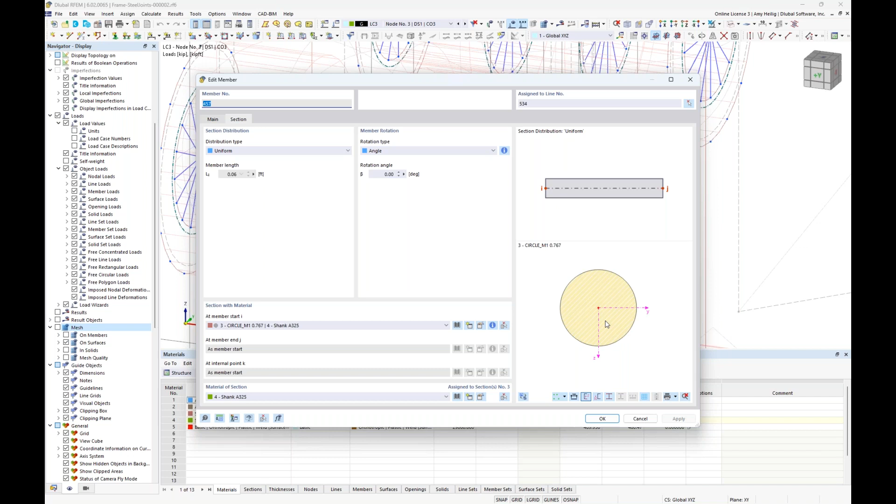And we are going to transfer the forces in this opening where the bolt is passing through with what we call these spoke members. These spoke members are nothing more than beam elements themselves with a cross section assigned. Everything is optimized here with the cross section and the number of spoke members in order to transfer those forces between the plate element to the bolt and vice versa.

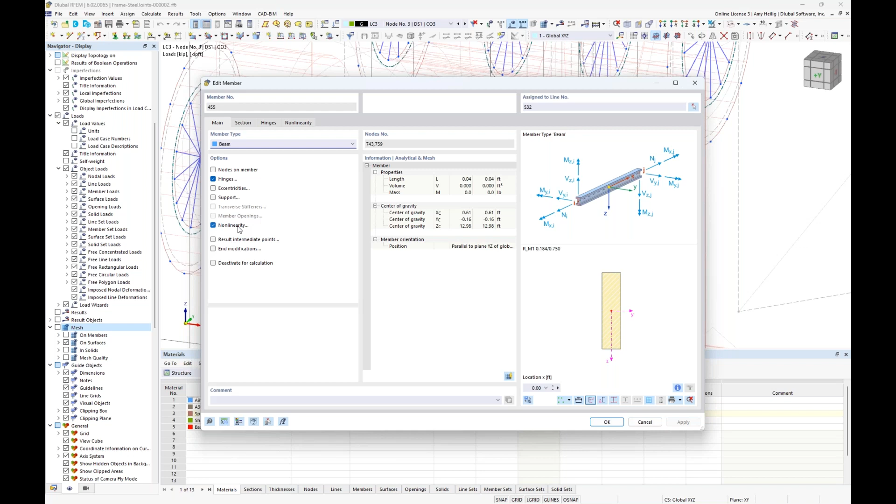We also have a nonlinearity applied here for this beam spoke member that it will fail in tension. So we really want this bolt to bear onto the plate element when it's in compression. But if we have any tension between those two elements, that connection will fully fail. So that's what's going on a little bit underneath the hood — it's really just putting together all of these different elements into this FEA model.

And by all means, you have the ability to manually create this same exact connection. We're just taking it a step further by giving you the ability to automatically generate this pretty complex model underneath the hood.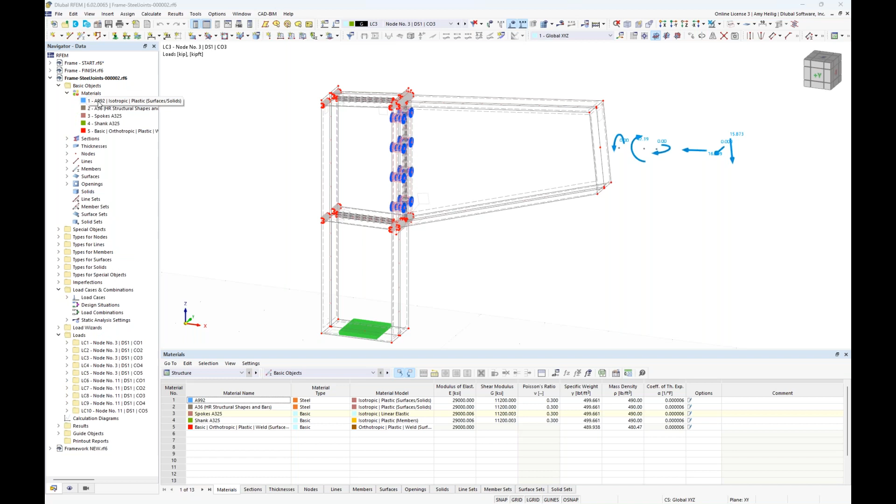A couple more things to touch on if we take a look at the materials. So all of the materials are listed here for our beam elements, and I'll turn this into a rendered view — A992, A36, and even our bolt elements and our welds have the relevant material. But you will see that these are now converted to plastic material models rather than that linear elastic.

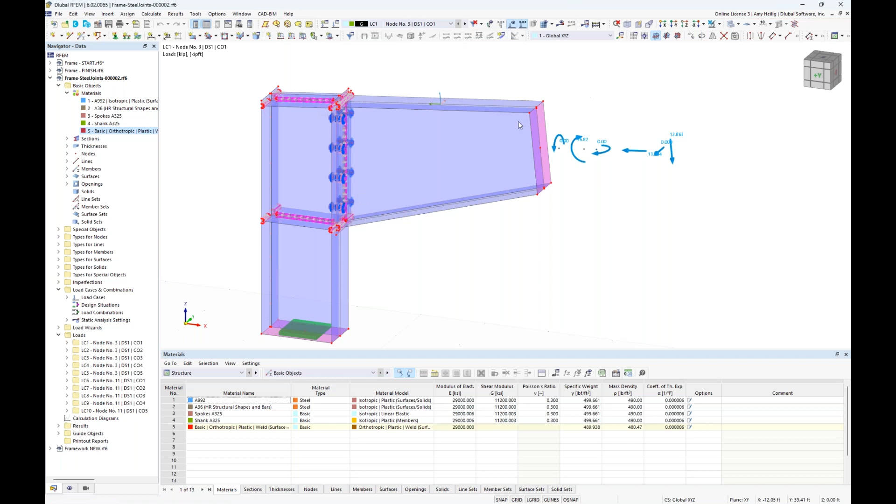And finally, if we take a look at our drop down about all the different loading scenarios here, these are our ASCE7 factored load combinations that are being applied here to the member end. As I scroll through these different load combinations, we should see these loads update automatically.

They're applied here to a rigid plate, so this rigid plate allows the load distribution across the entire face here. So we don't have to worry about topics like singularities because this load is distributed again to the entire face of these elements. And remember too, that we had to set at least one supported member — well, we can see that support applied here at the bottom of the column.

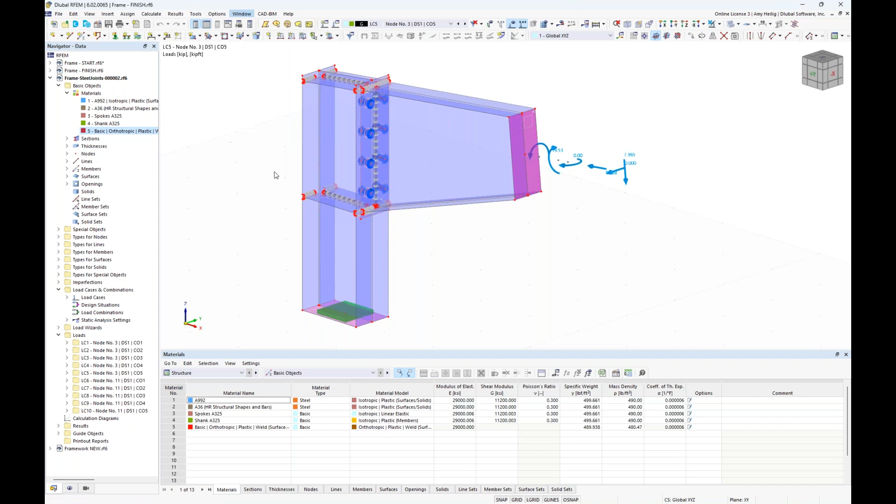Okay, so that will cover here just the submodel. So let us go back to our frame quickly to talk about the buckling behavior.

So in addition to the design according to the AISC, if we go back to the steel joint design, we have an additional drop down here for the buckling analysis. And looking at the buckling analysis results in table format, we are calculating 4 eigenvalues here for each connection as well as each load combination.

So as we scroll through these, it should highlight exactly which connection we're looking at, and also you'll see here our critical load factor. And if you remember, under the configurations, we told the program to flag us if this critical load factor falls below 15.0. So what is a critical load factor?

Well, if we're currently looking at our connection here, and load combination number 2, the critical load factor is the value or the factor that you can multiply your loads in load combination 2 by before you're going to see some type of buckling behavior.

So when we are getting down to values such as 1.0, this is a very big problem. Anything less than 1.0, the connection cannot handle 100% of the loads before we're going to see buckling. So again, we can kind of set that user-defined value of when to flag us for that critical load factor.

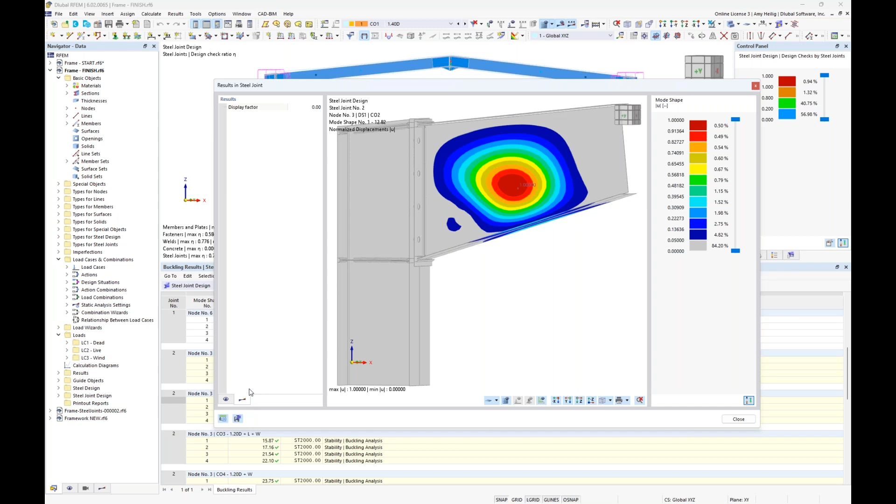What might be interesting too, in addition to the table format, is to launch these results again in the steel joint. It will look similar to before, but with a slight modification: now we're viewing buckling behavior, so instead of stresses and strains, we're viewing the eigenvalue, or eigenmode. We can see that under load combination 2, with a critical load factor of 12.82, we might be concerned with buckling within the web of our tapered member.

If we scroll back up to our center connection and launch the display of buckling behavior, notice this critical load factor is much higher for load combination 1, at 31.09. But in this case, we might be more concerned with initial buckling of our flanges, with a secondary concern of the web elements for that center connection.

Buckling is certainly not easily accounted for with hand calculations or analytical calculations for connections. So we have the ability here to carry out this additional analysis and determine, if buckling is a concern, whether we need to increase the thickness of these surfaces, such as webs or flanges, or add additional stiffeners with those component input options.

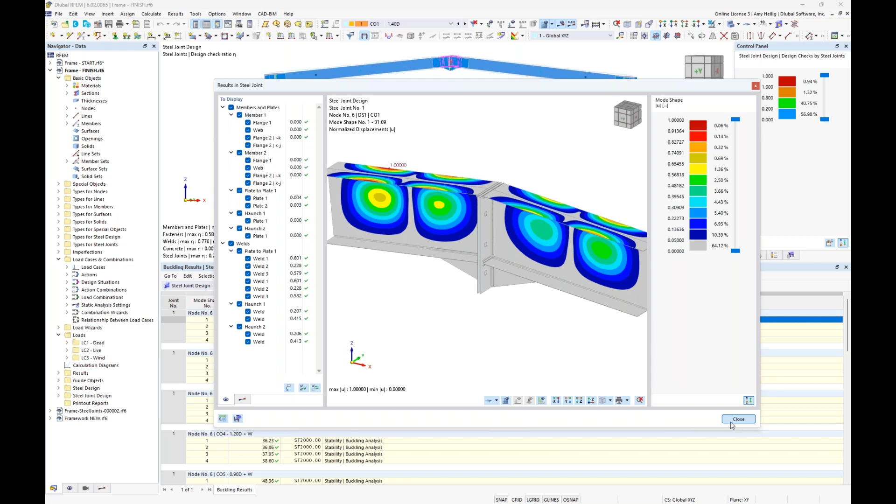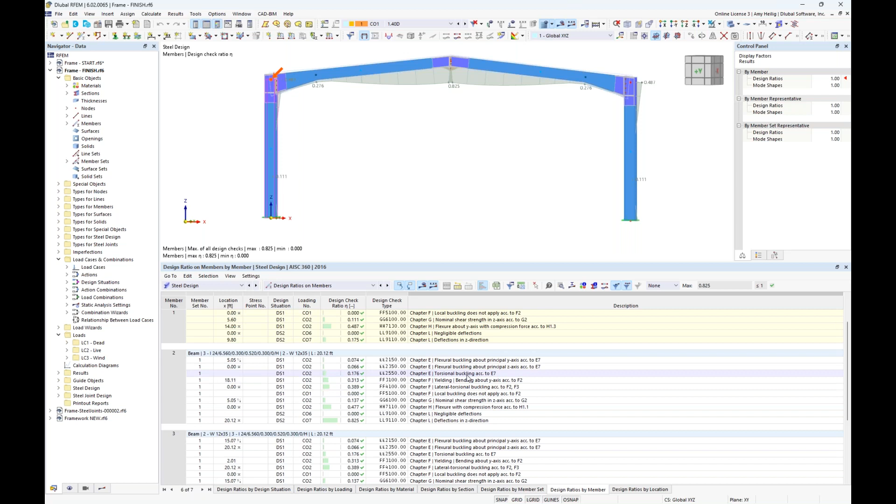That sums up the connection design, but keep in mind we also did the steel member design. We can view the results within our table format, showing design ratios by each member. Just as with any other steel model, we get full design according to the AISC, with calculations carried out according to each relevant chapter. So the ability to design both members and connections is quickly shown with this example model. That sums up this example.

Now, I know this was a very simple application, and you might argue you could easily do hand calculations or use current software for connections such as this. But I wanted to open up another RFEM model with a bit of a bigger structure.

You'll notice we have multiple steel members shown in 3 dimensions, and I've even modeled a couple of concrete platforms within this structure. If I go to the wireframe view, you'll also notice I've defined these joint connections at all of the major intersections of our steel members.

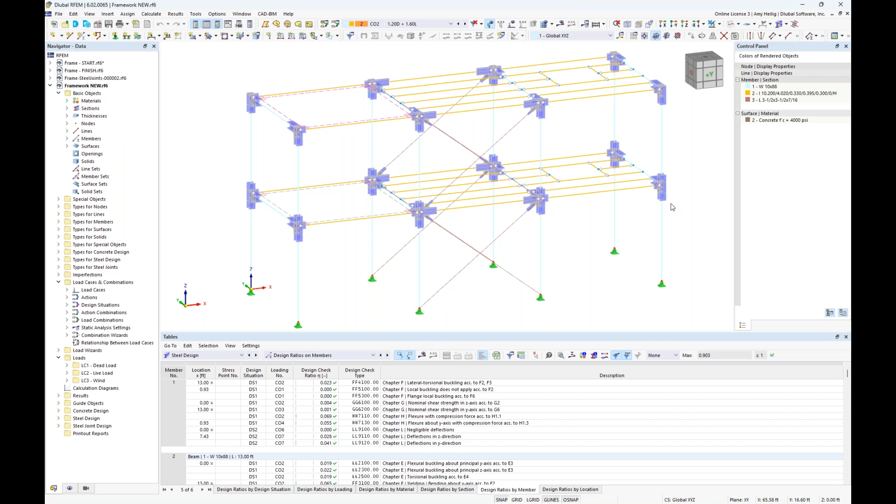If we take a look at one of these particular connections, I'll create a visibility by selected object and turn this back into a solid rendered view. When we zoom in, we can see this connection is certainly a little more complex than what we just saw with our 2D frame.

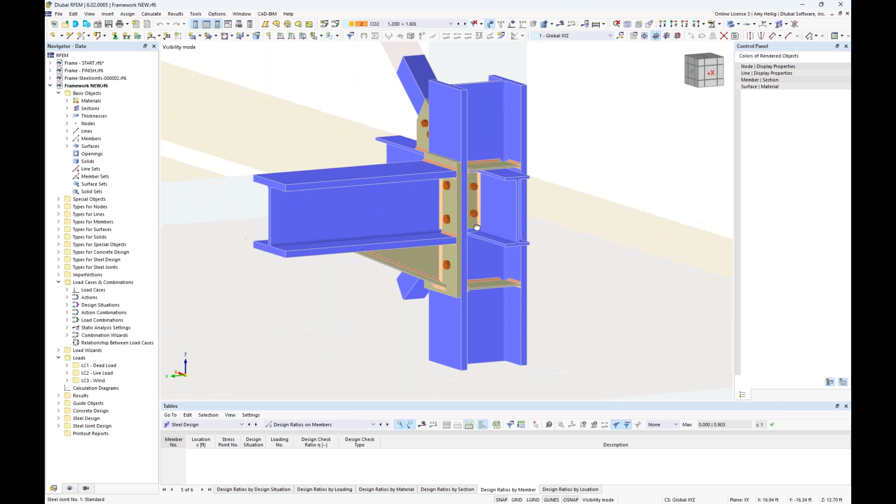We have beams framing into the column in the strong axis, and also beams framing in the weak axis. I've added end plates, haunches, and we have stiffeners shown here. So quite a bit more going on.

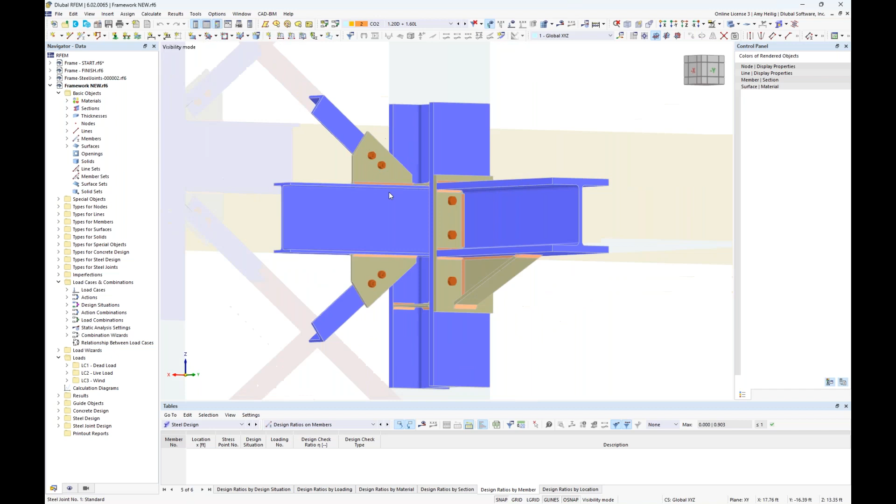If we rotate over on the right-hand side, we also have these tension-only braces framing in, transitioning from these plate elements, and they are welded to the top and bottom flange of my beams. So we can also carry out the full connection design here.

I'll zoom out and rotate this back around. Under the steel joint design, you can see the design ratios for each of these nodes is carried out. We have 3 design checks here for our plates, our bolts, and our fillet welds, all encompassing an FEA submodel shown for each one of these connections.

We also carried out the steel design. Again, all of these steel members have been automatically designed according to the AISC, and I even took it one step further to design these concrete platforms, carrying out the ACI design considering the reinforcement applied. We see a couple high reinforcement design ratios shown here, which is no surprise—an issue of shear where these platforms connect back to the steel members. But all in all, this is an all-encompassing option within RFEM to do multi-material design along with the AISC connection design.

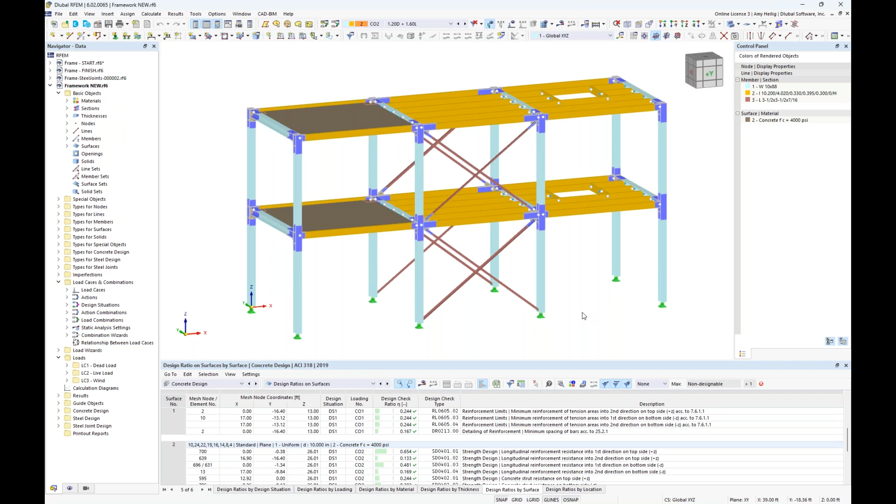Currently we support all AISC cross sections, and you can even input user-defined parametric sections as well. You're not limited to only the AISC sections.

The only exception to this is round HSS. Currently we support square and rectangular HSS, while round HSS is in development and should be released very soon. A preloaded bolt input is also not quite ready, but is currently in development for topics like slip critical connections, so that should be available soon.

We also recognize the AISC 360 2022 was released, so we'll go ahead and add any updates to the standards. You'll have the ability to design according to the 2016 or the 2022 version as soon as we implement that.

Additionally, we are planning to add the ability to export the true stiffness of this model back to the main structure. This joint stiffness is already calculated with the FEA submodel, so we know the stiffness of the connection. We can export that stiffness for the member design rather than having fully fixed or fully released member end releases, so we'll be able to account for the true stiffness there.